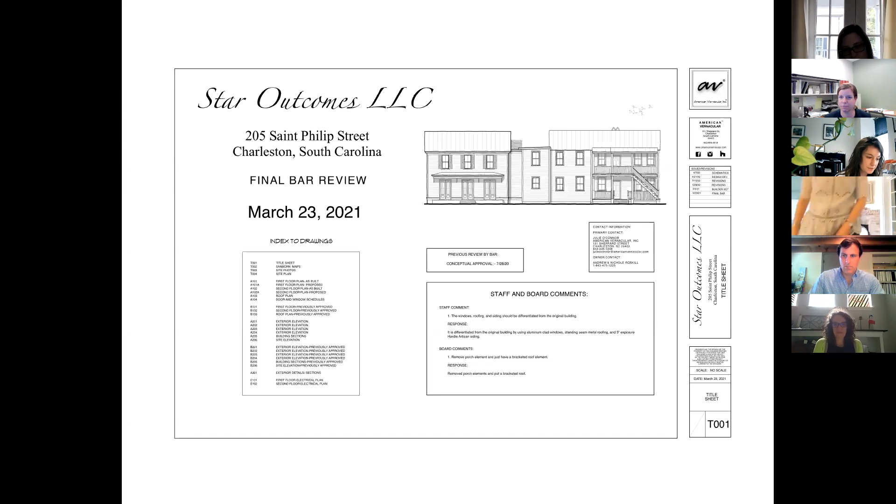Kim, could you go to the elevation page? Yeah, right there, thanks. Actually, Kim, could you go to B203? There it is, okay. So this is a depiction of what we had submitted last time versus this time.

Essentially we took the board's comments about the porch and did a bracketed roof over maybe a little raised patio element versus a proper porch on the side, to reduce the volume and visibility from the street. That's probably the only part of this building that will be visible, because it's so far back on the property.

Additionally, we did end up needing a two-story connector piece, but we don't believe it will be visible at all, because it's tucked in fully behind the volume of the second house. It's also not as wide, so it tucks in pretty nicely.

But essentially, we kept the design the way it was. We appreciated that you recognized we kept the ceiling heights low, and there wasn't a lot we could do about the building's height. But it is, in my opinion, as secondary as we can make it, particularly when you look at it with the main front house.

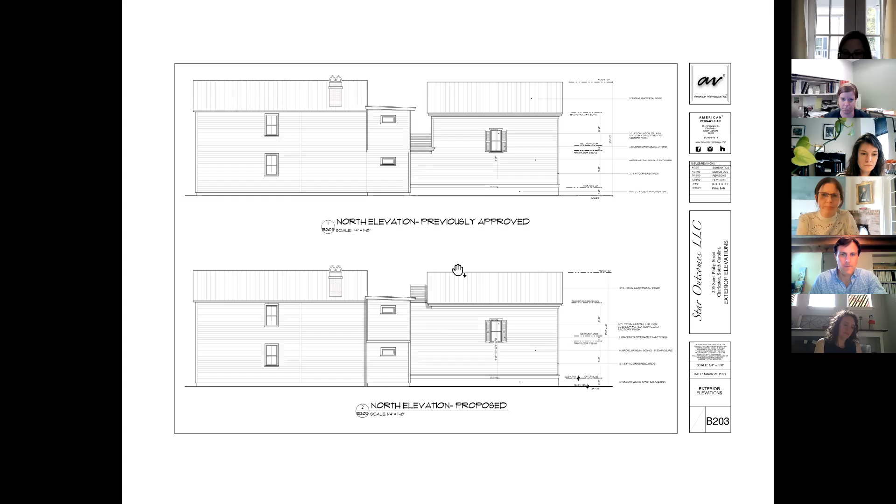What's the material proposed for the porch floor and the stair tread? I couldn't tell from your section. Yeah, so that'll be masonry — a stucco rise and then a bluestone top. My clients are also preparing a new landscape plan from Cindy Klein that will include some beautiful materials and hardscaping. Thank you.

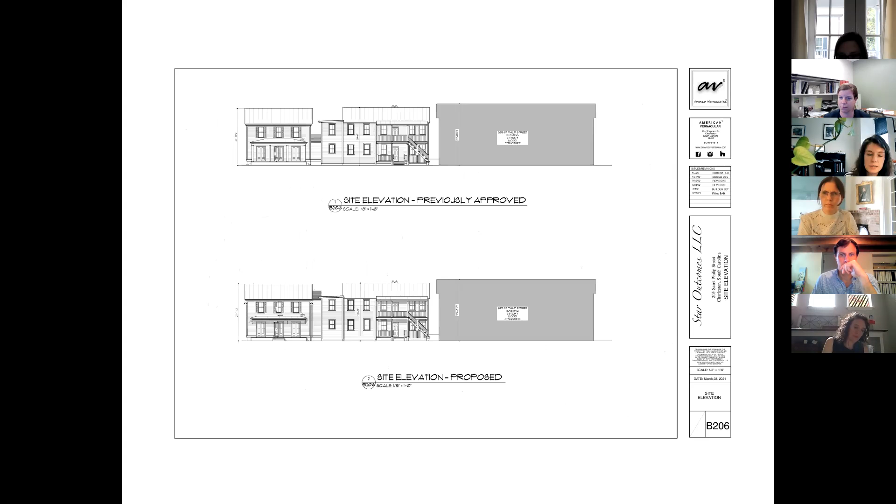Any other board questions? All right, we'll move on to public comment. We don't have any public comment.

On to city staff recommendations, Kim, thank you. We just have a couple comments. The rear addition may be further differentiated by using a 6/6 window instead of a 2/2, but all other materials and finishes clearly delineate separate construction campaigns, so this element is appropriate as proposed. The hyphen has been extended to include a second story since conceptual approval was granted. Volumetrically on paper, the previous version was more appropriate and respectful of the addition, but it will be too far away to perceive from St. Philip Street and blocked by a gable roof on Spring Street. So staff is recommending final approval with staff comments.

I'll start. I was not here for the original application, but it does appear that the applicant has answered the board's calls for a few tweaks. And I'm pretty sure that this new volume is going to be the most logical and orderly volume on this site. So I feel good about it.

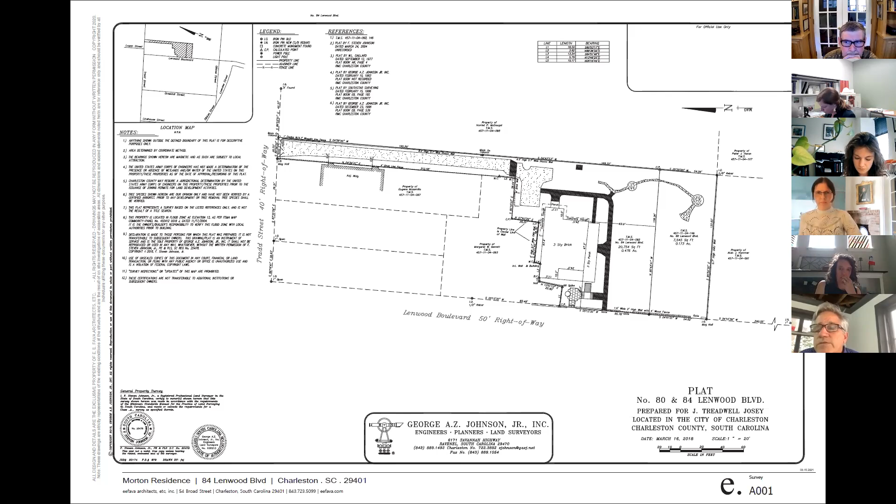Next page, please. So again, just a more detailed site plan of the existing conditions, and we have vetted this with the zoning department, Lee and Penny. No issues there. Next, please.

As Kim had highlighted, the area where we are putting the proposed garage, where a kind of screen porch structure had stood previously, the location of the stair, and immediately to the right of the garage location on the site plan where the proposed pool will be is where one stood previously, and is being put back into place with a much more handsome design. Next.

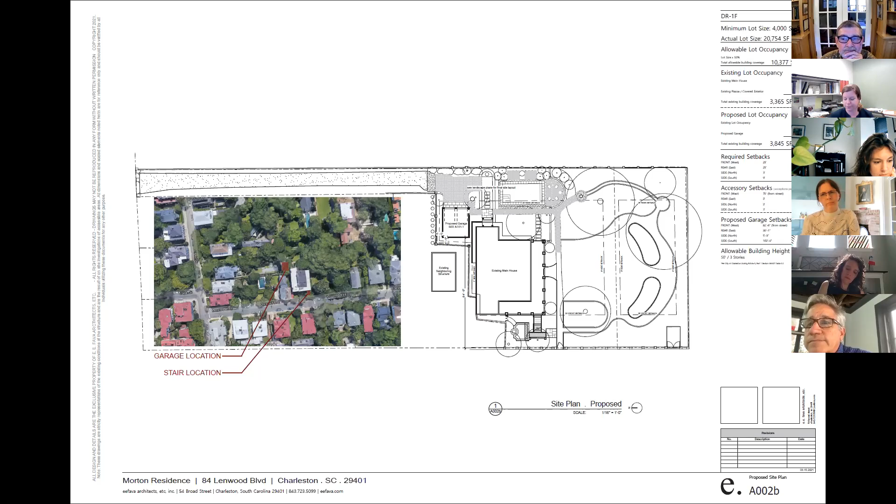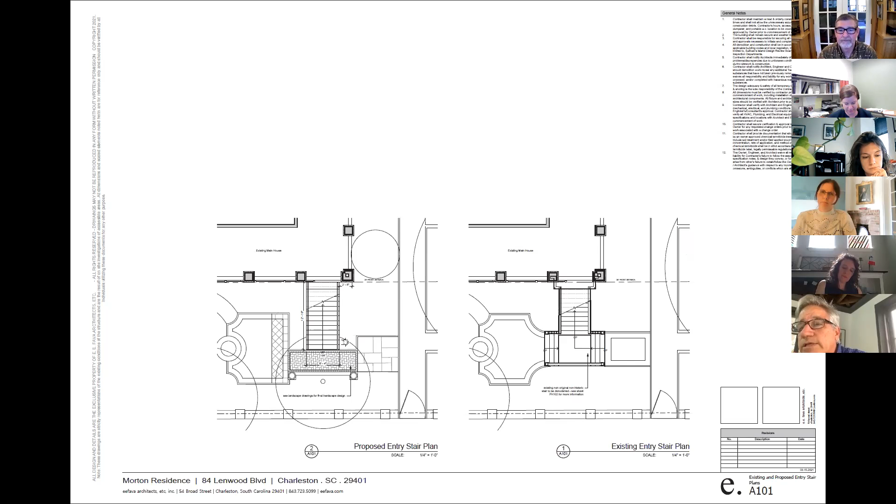So as far as the plan goes, the one to the left is the proposed entry stair, which becomes more of just a straight run, a masonry stair, something that's much more appropriate to the caliber of this structure. The idea is, again, it's a masonry with an iron rail and covered with probably fig ivy or something like that. The current stair is a wood stair, again, post 2004, that's demonstrated on the right-hand plan, which has an awkward transition between the two spaces. Next.

The garage structure is again very modest, a one-level structure with a shed roof, so as not to be obtrusive in any way, shape, or form to the neighbors. It is completely behind and out of view from anything publicly. The left area shows where it would sit in its proposed design, and the existing shows the open area.

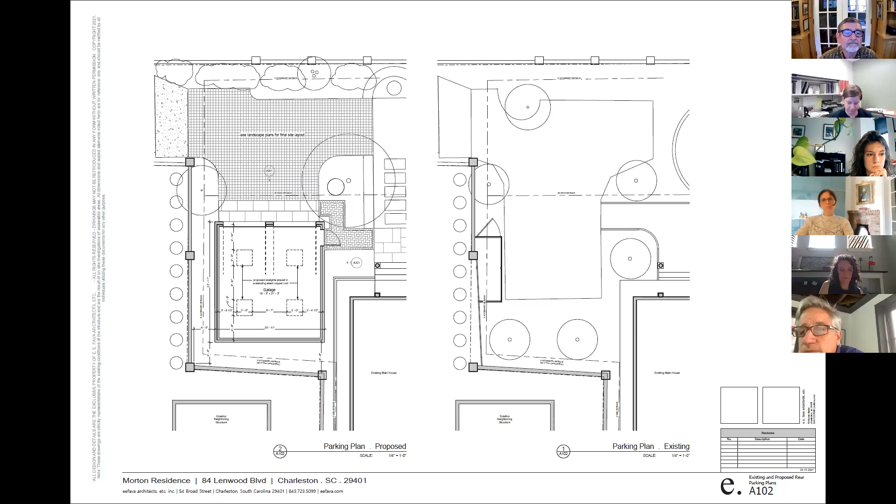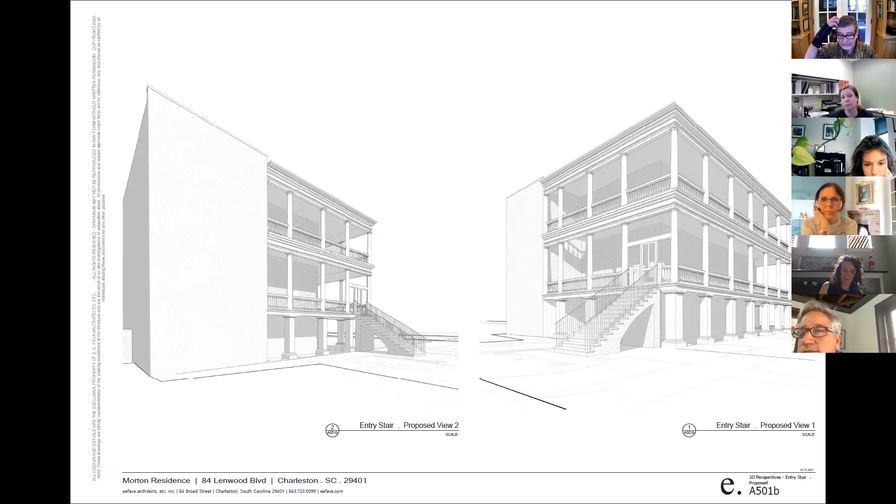What would be proposed out of all masonry, as we said, and detached from the existing house. The area for the current garage, where the garage would sit, and as proposed.

We've got some reference photos, and as Kim indicated, it's a little difficult to see, but top left is as you approach the house, which would be on the right from Lenwood. The next one is looking head on to it. The one over is the gateway to it, and once inside the property, that's what you see, where the entry stair would be to the right under the canopy of the tree.

The far right photo at the top is the view of the gate to the Tradd Street area. The next photo down in row 2, far left, is the length of the driveway. If I'm standing with Tradd Street at my back, you get the length, and can see the perspective of where it goes up, and it terminates at the next photo where the proposed new garage would sit.

The next photo is looking back towards the house where the garage would be adjacent where the former structure was. The next several photos are really just trying to give you an idea of the staircase that's there presently, kind of oddly put together with some maybe less than typical balusters and rails. It's been there a little while and maybe not out of the best material and starting to show some signs of rot, but more than anything, it just seems a little odd for the home, and something a little less obtrusive and more substantial material-wise would be more appropriate.

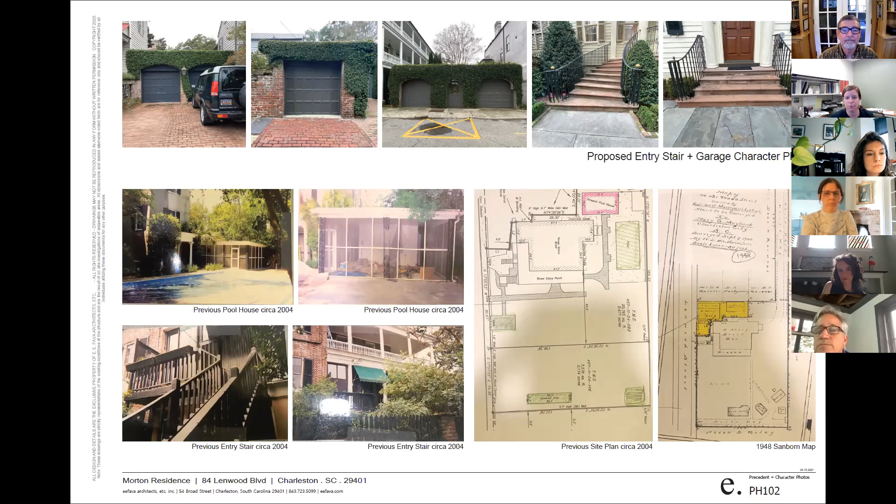The bottom right 4 photos are all in reference to the structure in the pool that had been there prior, and plans addressing that as well. These are Glenn's plans where all of the associated landscaping details and the layout for the pool were put together.

I think again, as you can see, it's been well specified with the materials and where the pool would sit. All of it is not visible, and I think here, because it's a category 2, but a significant improvement, it's extremely respectful of what the house is doing. The pool's 14 by 20 in a current, or what was a former location, with the stone band around it. There's a low masonry wall at the right where you see the seating area. It's perforated brick. Again, not visible, but a wonderful addition to the property, defining and securing the pool area.

I can probably go through these rather quickly, but addressing the staircase, that's what we had discussed before. That's the existing area, and Glenn has been kind enough to weigh in on how that area would be re-landscaped.

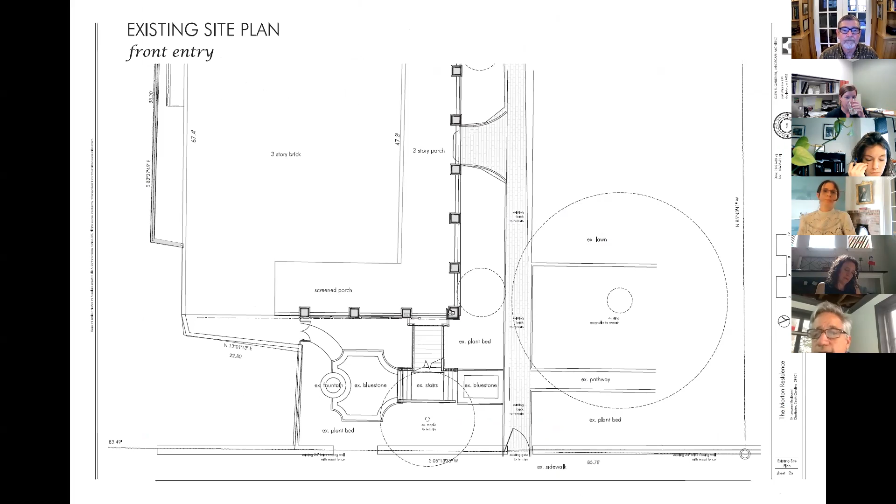This is the existing area of the rear that you had seen when we were putting the garage and the pool, where presently it's just a drive and a lawn. The area of the demolition.

The simple solution to the new stair, which opens up the space and respects the tree that had been planted there prior. Next, please.

The pool design and how it will connect with paving and the materials specified accordingly for the garage section. Again, it's remote and will not have any visual impact with neighbors. Next, please.

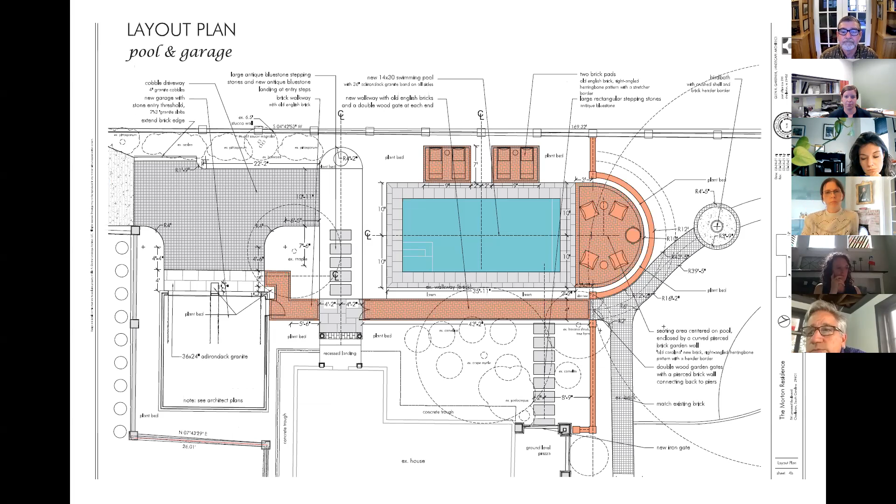These are Glenn's details associated with all of the materials. We did speak with Historic Charleston and the Preservation Society, and there were objections from neither. The Mortons spoke with their neighbors, at least 86 and 129 Tradd, which are adjacent and probably most impacted, and there were no objections voiced by them either. Happy to answer any questions. Thank you.

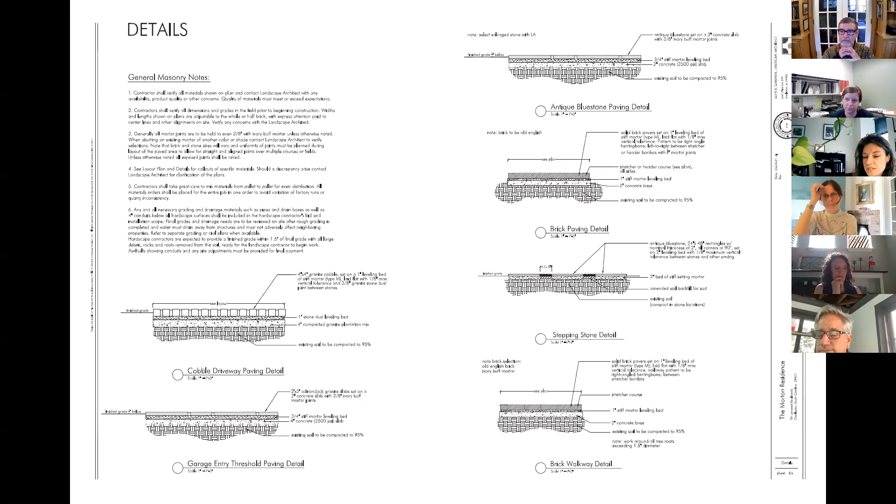Thank you, Mr. Fava. Are there any board questions at this time? All right, we'll move on to public comment. There are no public comments.

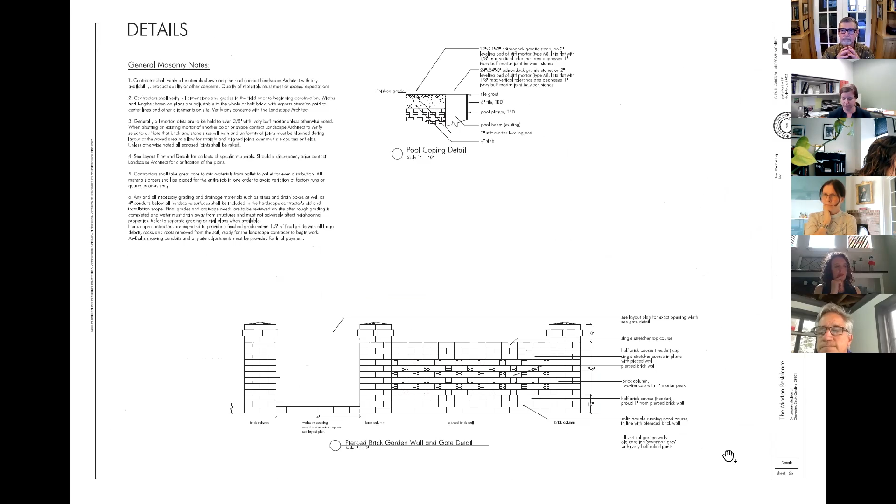Kim, I'll turn it over to you for city staff comments and recommendations. We just have a couple. Although it's very handsome, unfortunately the garage is not visible from the street. The much improved stair is visible, but again, an improvement on what's there and relates to the building more appropriately for the historic house. The hardscaping is minimally visible, if at all, but it appears to completely be appropriate and lovely. So we are recommending final approval.

Thank you, Kim. Mr. Fava, did you have any response to the staff comments? No, we appreciate it. The Mortons and myself and Glenn both, thank you. All right.

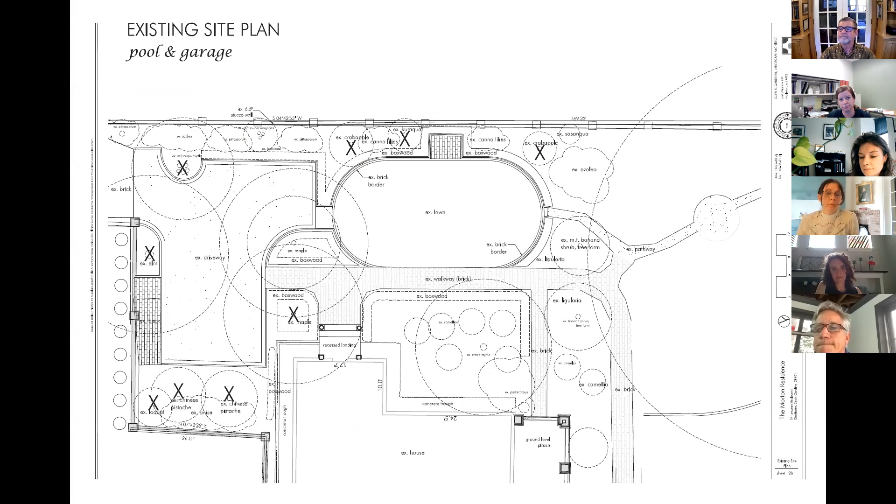Now we'll open it up for board discussion and a vote. This is Julia, I think it all looks great. I wish that stair could magically float without the wall support back at the porch, but it's totally fine. I think this is lovely, and I agree with staff.

Fillmore Wilson here. I think it would be difficult to find something to object to in this. It's a really nice plan, and I particularly appreciate the materials in the garage. So I agree with staff. This is Lindsay, I agree with staff's comments that it is unfortunate the garage is not more visible. It'd be really nice, so I agree with staff.

All right, I'll make a motion for final approval. Bill, did you have? Oh, I was just going to say I did log in late, I apologize. I don't know if I'm eligible to vote on this, but I did review the drawings ahead of time, and I do agree with staff's comments and recommendation. Yeah, so you can vote.

Julia, did you want to make a motion? Sure, just for final approval. All right, we have a motion on the floor from Julia for final approval. Do we have a second? Fillmore Wilson, I'll second. Thank you. Put it to a vote. Bill, yay in favor. Julia, yay in favor. Fillmore, yay in favor. Chair votes the majority and the motion passes unanimously.

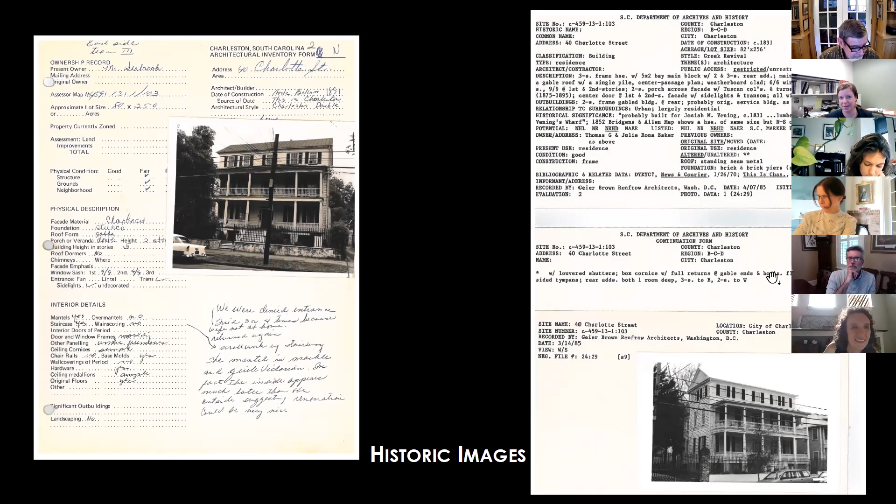The next one on the right is from 1985. And these are the Sanborn maps, 1888, 1902, and 1944.

Mr. Huguley, if you're here, you can have the floor whenever you are ready. Thank you, Kim, can you hear me? Sure can. Hi, I'm John Paul Huguley, I'm the founder of the American College of the Building Arts, and this is a new project for us. 42, as Kim mentioned, it's behind 40 Charlotte, an 1831 Category 2 building. The front house has a lot of historic ties to the building arts, which is important to us.

The people that have owned the house from the very beginning—even the lot before—were a carpenter, and the person that built it was a lumber merchant. The second family, the Walker family, had the property for some 70 years. They were stone importers and introduced a lot of the stone elements to the property, the beautiful steps and marble mantles.

Lot study is the most important part to understand about this lot. Like the last project, it's very deep—shown in green at the top, the lot is 255 feet. As Charlotte Street diverges from Chapel Street, these lots get extremely deep through there. Looking down Charlotte Street, a typical lot would be 112 feet, a whole block is 224, so a whole block could fit in our lot and still leave about 30 feet.

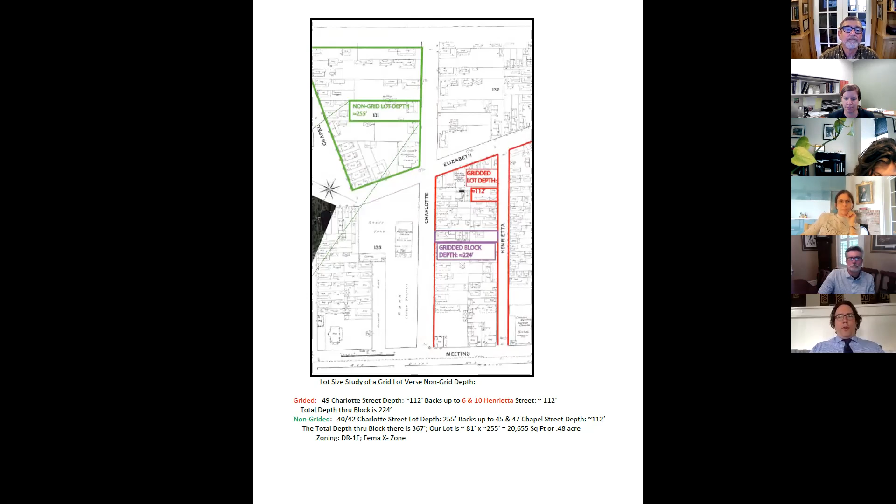That weighed into the idea of what we wanted to do with this, looking at the back buildings and meeting the neighbors to try to understand what could be built back here.

This section was most helpful—you can see the historic house on the right at the top, and from the front line back to our proposed building in the back it's almost 200 feet to the front wall, but 200-something to the middle of the building. You can see the building on the bottom left and the footprint, but pay attention, there's a large oak tree on the east side that we were paying respect to.

Over the last 2 years of owning this property, I started looking at the light on the property, the architectural history of the neighborhood, which I didn't know a lot about even though I've lived here a while, and the present-day neighbor concerns.

What was most interesting to me, presenting to the BAR staff this last year and to our neighbors, was that the number one issue has been how you'd develop any property with this much land in the back. I committed early on that I wasn't looking to be a developer and put 7 more lots back there as zoned, but to build something for myself—in this case a duplex—so I can help fund some projects for graduates of the college and the students. That's really important to me.

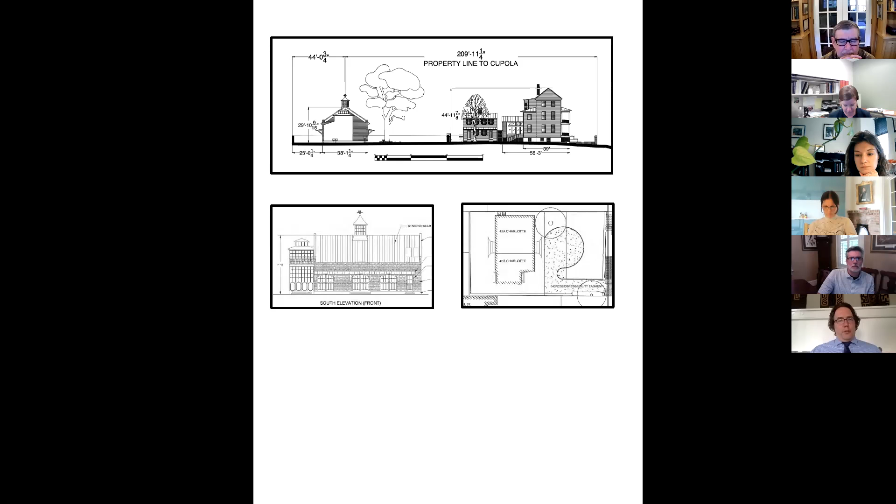Go to the next slide, flip through these next few slowly. These are things you've seen before—this is the straw bale wall you approved, with the traditional lime and brick cap, which we did as a workshop with the students to define it.

Stay on that shot—it gives a great look. Looking north, you see the huge oak tree on the right. Our building will be set back behind this garden wall, in what's called 42; this picture is taken from 40. If you look all the way back, you can see the White House with the blue shutters, which sits on Chapel Street.

What we learned through that workshop and getting to know neighbors was that there had been a battle before on our street, Charlotte Street at 21, where they developed the back of a property and added 4 more units. That lot is smaller than ours—only 0.38 of an acre, versus our 0.48—but they brought in smaller units, kind of what's popular today, maybe a micro home or something small.

I committed from day one that although I wanted a place to live, work, and entertain with the building arts to showcase, I wouldn't necessarily want to go that direction. Overwhelmingly, in the letters of support, the neighbors are adamant about please don't chop it up. Through our studies with the students and the work we've done, we've shown the outbuildings that are here.

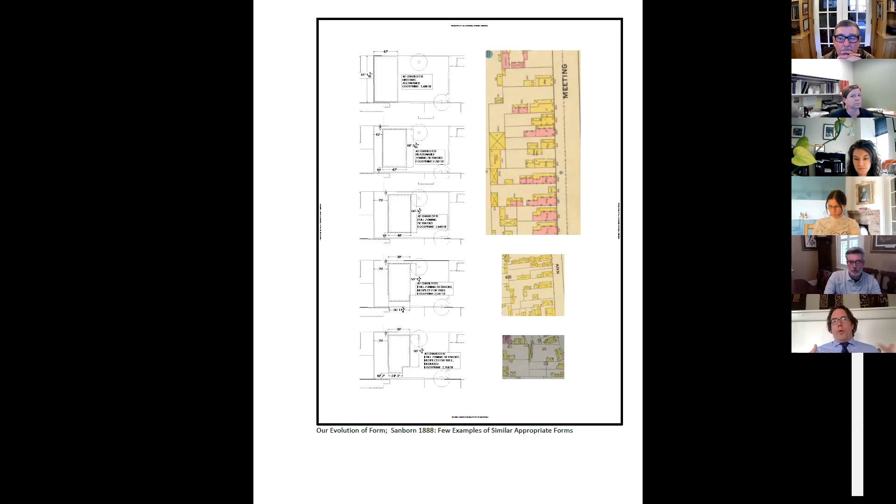It usually is set on the line of the property, with no fence. In this case, working with zoning and some of the challenges previous neighbors had, we pulled it back and kept shrinking our building, but we were tight between the tree and our setbacks. We have a neighbor in the back who worked with us from day one, saying she didn't want anything built here, but if she did, the more setback, the more we could work together, which I'm hoping we tried hard to accomplish.

Can we go back to that photograph? The one on the right is really important. This shows we found plenty of examples of larger outbuildings, and we're aware of 543.06, and we want to make sure it is subordinate. So we brought all of our heights and footprints, but what we wanted to show was which model did we want to pick, using our timber framers and picking something that is authentic.

If you look at that photograph of the Sanborn maps, in the middle, this is a great photograph of Meeting Street right up close to us. Go back one - yeah, upper right. Zoom in, back, right, stay on there - right on that shot up in the middle, you'll see four different residential outbuildings. This is just the easiest one because it's clear.

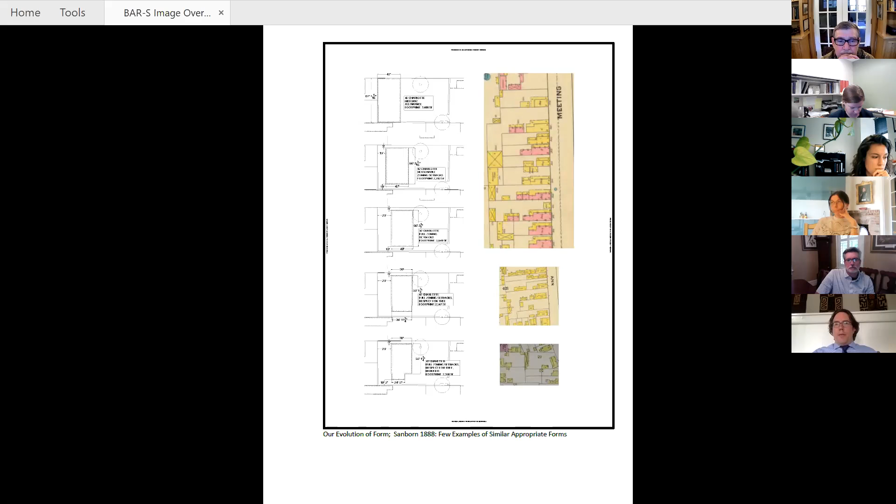304.5 Meeting Street is approximately 50 by 58, so it's a large structure in the back. It's not a look that we wanted from a timber framing perspective. The second one down, which is labeled - if you could zoom in, I don't know how close y'all can see, I cannot, it's very small - but it says wagon shed. It's pretty cool. It's kind of the one we went after.

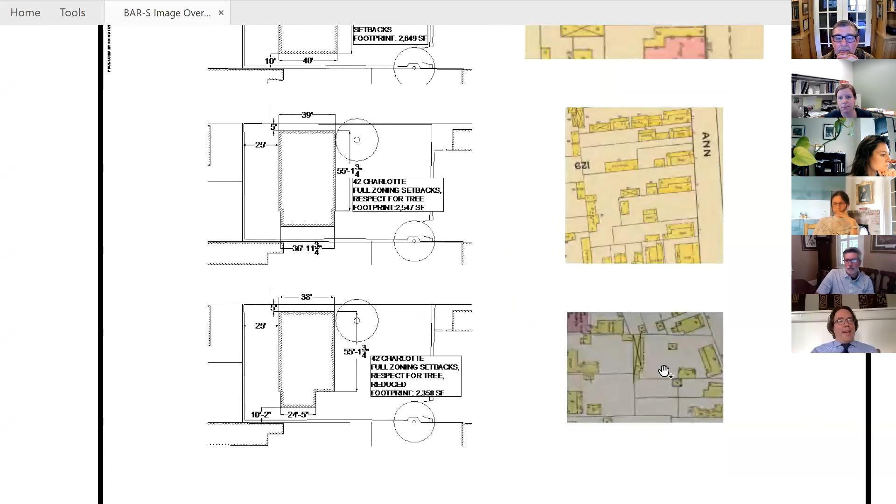You're on it, stay on that shot - yeah, there you go. It's the second one down in the middle. Slide down a little bit, keep sliding down. So this form is the best form that we've had, which is the wagon shed, which is more like a 36 by 55.

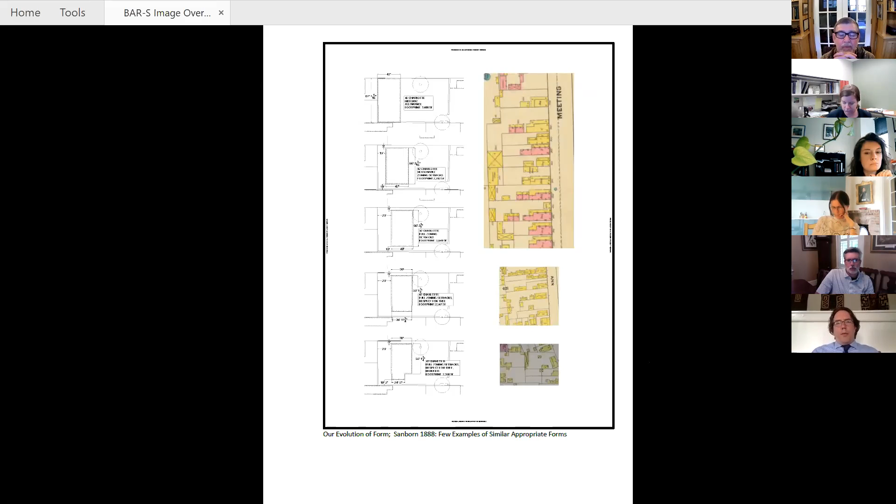So the studies that we've done are attached at the bottom. We put them in there for y'all's reference, with the drawings as well. Kim, can you just jump down to the actual couple more shots? Right there, they're the height studies. There's a good one - back up one.

Go forward one. Okay, so there's the height study of our barn-like structure on the left with its glass conservatory, compared to the heights of Chapel Street. And we know we're shorter than the front house, which is at 45 feet. We're at 30 feet. We just place these against that.

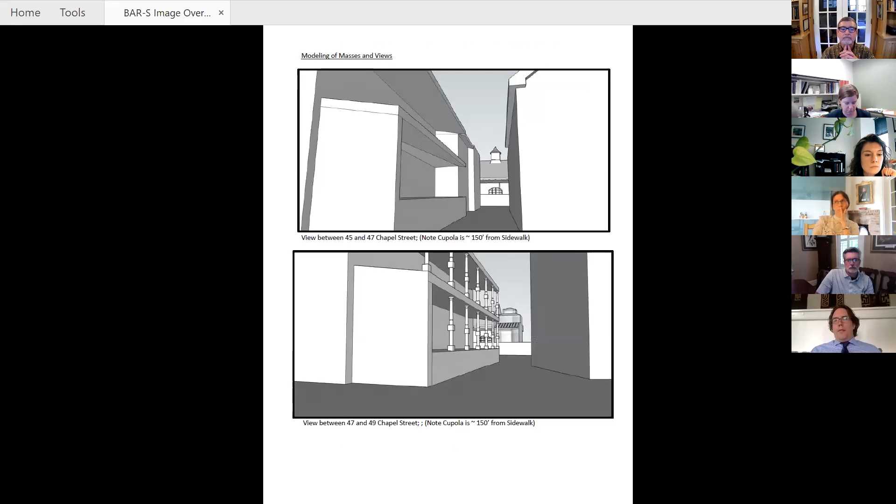And then will you go forward, Kim, one more please? These were studies that Kim asked us to do, looking down from the front and looking back, to get a sense of how far back this structure sits. It's right at 150 feet back. Go one more, Kim - and it shows you from Chapel Street, looking through two of the houses, kind of the view you would get.

I didn't mention the glass little conservatory. It was on the property. There was a glass structure, and we want to introduce that. Go one more, Kim, and I'll wrap up for you. Oh, go back one, sorry.

So these are the looks through to the property. The main points here are that we have a charrette coming up with the students to start doing design of windows and doors, but we wanted to get a general direction and conceptual direction that this form, this one structure, a duplex in the back of the property, is the direction we want to go, rather than trying to break it up into smaller units.

And we feel that way. And more importantly, we feel like we met the test of 54306. And finally, creating kind of a living laboratory where we can showcase the authenticity of timber framing, masonry and plaster. We don't have that here in Charleston. We don't have one place to go to see that. If you have any questions, I'll stand by.

Thank you, Mr. Hughley. Do we have any board questions at this time?

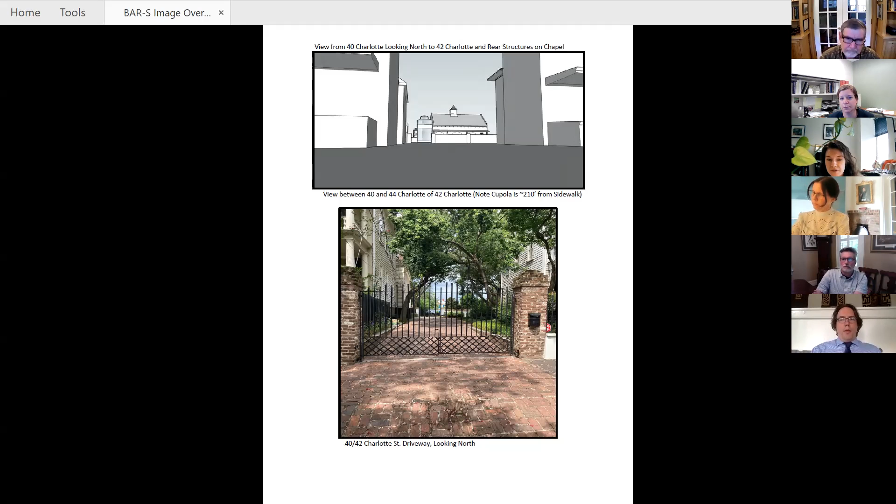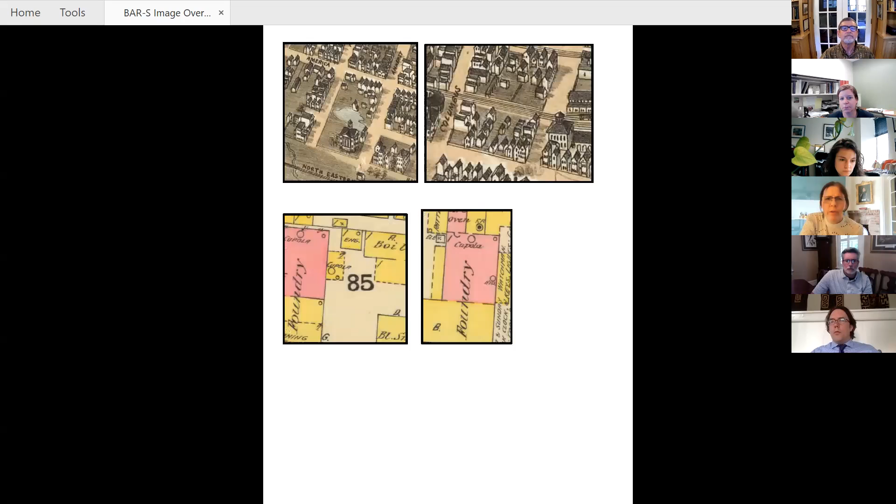I have a quick one. Since it seems like height is kind of sensitive, I'm curious why you are raising the first floor, because doesn't it sort of render those carriage doors unusable? Yeah, great question. Can you hear me? Yes. Okay, I wasn't sure if I was on.

We're going to do a raised basement like the front house has. So we do have to work on that transition. The staff has already given me a couple of ideas of what to do, but we're going to work in the charrette coming up about how it can still, we're calling it a coach house right now, keep its architectural direction as a coach house, but still also have a little raise.

And you want to do that in timber framing. I know, Julia, we don't want that splash line off there, even though we have the brick there. We would love to have some kind of raised 18 inch base if we can. Did that answer your question? Sure, thank you.

I just have one question. It appears to be 30 feet plus the parapet. Plus, what is the height of the cupola? What's the overall height of the building? I think, Glenn, it's 37 or 38. I should know that, but I don't know.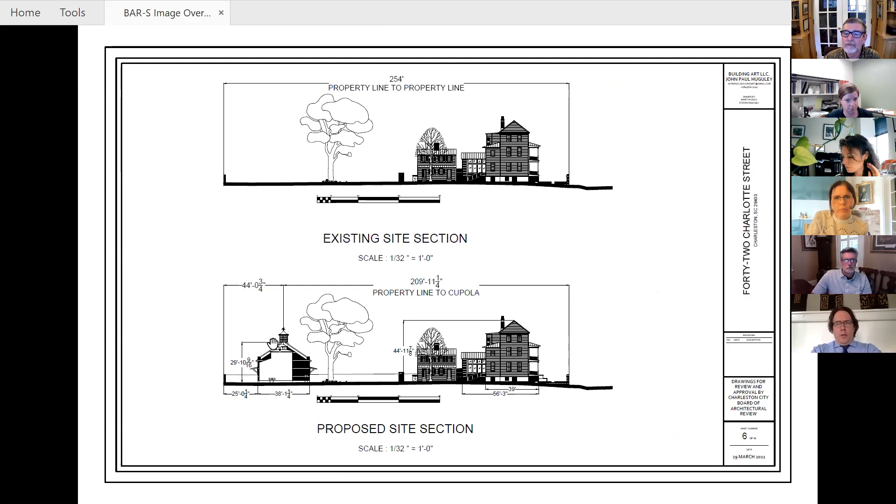It's on there, but the ridge is where we measured it from. Yeah, go down, zoom into that. Does that go to the cupola or just the height? Just the ridge. And that's what we went off of, just because of sections 354, 308. I think it's 7 feet if I'm remembering correctly.

Did you hear me okay? I can hear you. Okay. Any other board questions at this time?

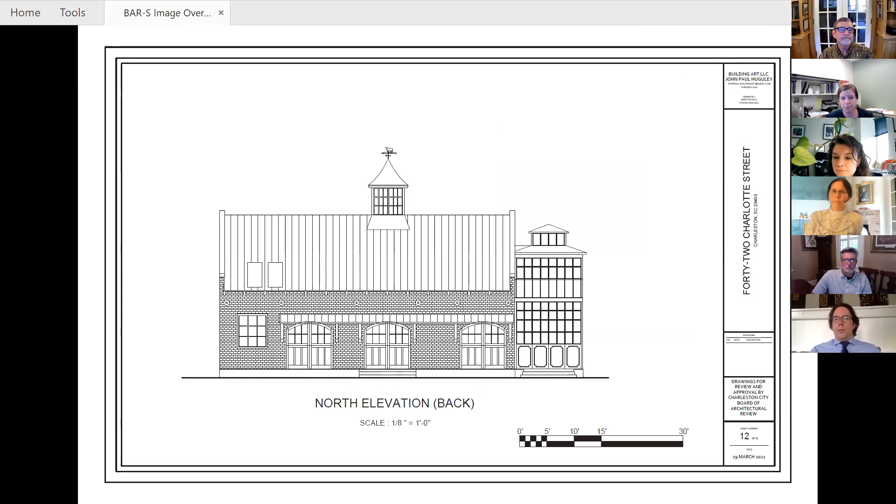All right, we'll move on to public comment, and we have several that I'll read out. All right.

To Charleston's Board of Architectural Review from Vicki and Pete Neighbor, the owners of 40 Charlotte Street. We're the new owners of 40 Charlotte Street and purchased this property with knowledge and design interest of what is being proposed to you on February 5th, 2021. The new structure known as 42 Charlotte Street sits within a horizontal property regime that we share with the applicant, John Paul Huguley. We have studied other options with more structures and smaller footprints, broken up massing and scale.

And prefer one brick structure with a relief system program, hence the added glass conservatory. We think that was a great compromise for us in the design process, with a nod to history for the glass structure that was once here.

We realize our front structure is tall, almost 45 feet, and working with Mr. Huguley on the duplex, he was able to make the structure a story and a half on this first submission by slightly adding to the footprint to restrict the height, i.e. 2 full stories or more.

Given that this structure sits almost an entire typical block back from Charlotte Street, we believe the depth of the structure and width are less important than height or breaking these into multiples. It was a design challenge that we feel is a win-win for us and neighbors, making it look like one structure.

We know he has continued to contact the neighbors to engage them in this journey, as we respect that immensely. The structure is oriented like our home and pays respect to a grand oak tree that we desperately would love him to keep. The orientation speaks not only to our home with its close attention to the location of the cupola and garage doors.

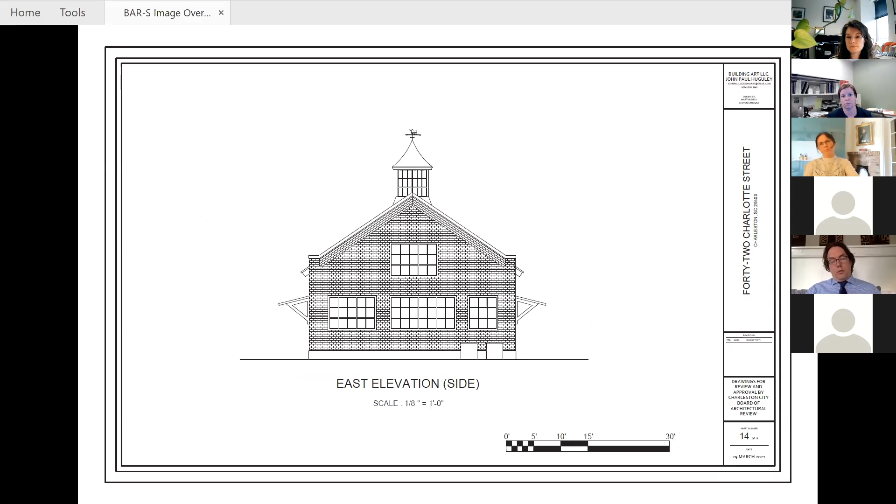We have several comments. The most visible element of the proposal will be the roof, the westerly door, and the conservatory. Staff feel that the roof is overly broad and is highlighted by the unusual depth for a rear building. Appropriate dormers might mitigate the most prominent and most visible feature of the project. The building is not subordinate in mass and seems akin to a warehouse, which is concerning, and narrowing the depth might help the massing be more traditional for a secondary structure in the neighborhood, and again, help the roof massing. Restudy and balance the fenestration.

The windows should be vertical in proportion rather than horizontal, and directed toward a residential scale rather than industrial. The westernmost door floats above the ground plane with no access and should become windows if there's no intention for access. The cupola is out of scale and should be restudied.

The concept of a conservatory is interesting, especially considering something of the sort was once on the property. Restudy and narrow the connection to the element from the masonry building. The delicate detailing here will be more successful. Some whimsical or folly-like details could be added, but it should remain fairly simple and relatable to the utilitarian masonry building. Eliminate the brick entirely on the western end of the conservatory. So the staff's recommending deferral for massing and general architectural direction. Thank you.

Thank you, Kim. Mr. Huguley, did you have any response to the public comments or staff comments, or want to clarify anything? Yeah, let me clarify a few things.

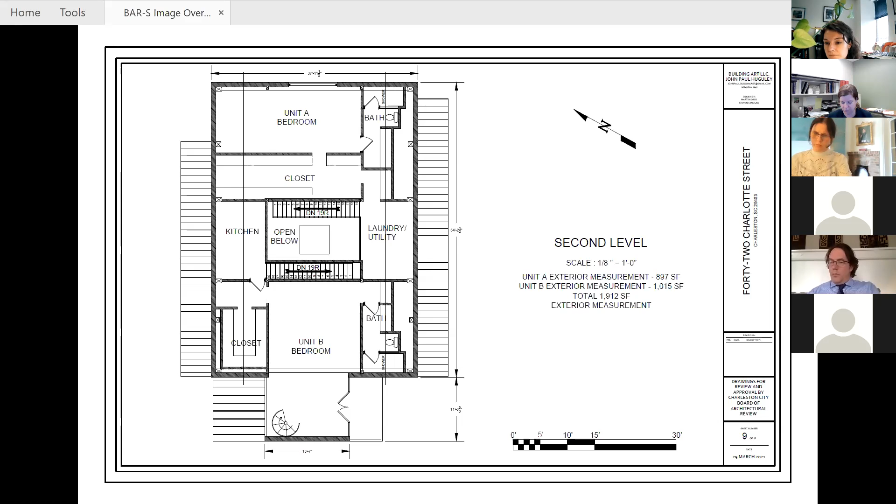This is Bill. I'll go ahead and start. I would say, and I appreciate that last comment from Mr. Huguley, I do agree with the comments of staff. I do think that they're all definitely valid and worthy of that restudy process. I guess one other point.

Seeing elements on this elevation right here, for example, it appears those are earthquake bolts or some replication of earthquake bolts. I'm starting to get a little concerned about differentiating this building historically, because I know the talent of the people that are going to be building this, and it inevitably could give a sense of false history to some point. I want to make sure that, and potentially in looking at the detailing, that there's at least obvious indicators that it's, you know, built of this time, just to conform with our Secretary of Interior standards, guideline.

All in all, as far as the single unit versus multiple units, I agree that is a better approach. So I would just say that I agree with staff's comments and recommendation, and then just that other side comment from me about making sure that it speaks of its time and doesn't go too far to replicating something, because I think with the potential talent involved in this, it could easily read as something from another time.

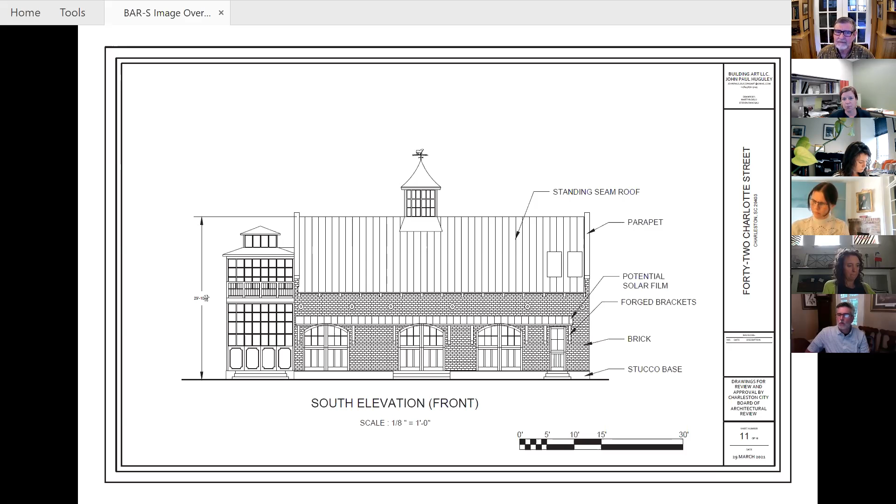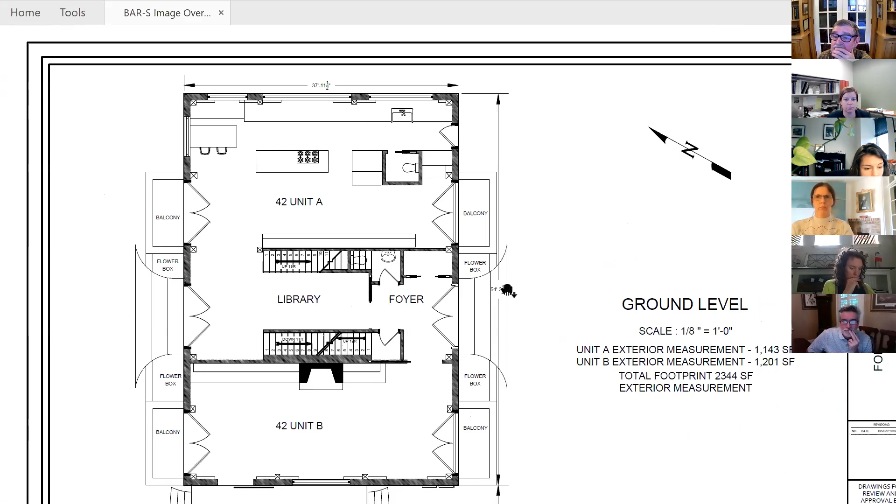Just to add, going back to the difference between a denial and a deferral - I'm actually not seeing that a denial from this particular board places any sort of time limitation on when an application can be refiled. So perhaps you're right, Glenn, about that difficulty between the difference of a denial and a deferral. I would say staff's comments are well worded and I believe do encompass what would have been my concern, so I'm more inclined to support the recommendation as well. I believe the comments we've all made have been taken into account.

So it's okay, I guess I'll go ahead and float a motion if you guys are ready. I'll make a motion for deferral of the application with staff's comments noted, and a board comment to assure that future proposals indicate a building detailed to its proper period. All right, we have a motion on the floor for a deferral of the application with staff comments noted and a board comment that any future proposal indicates the building to its proper period.

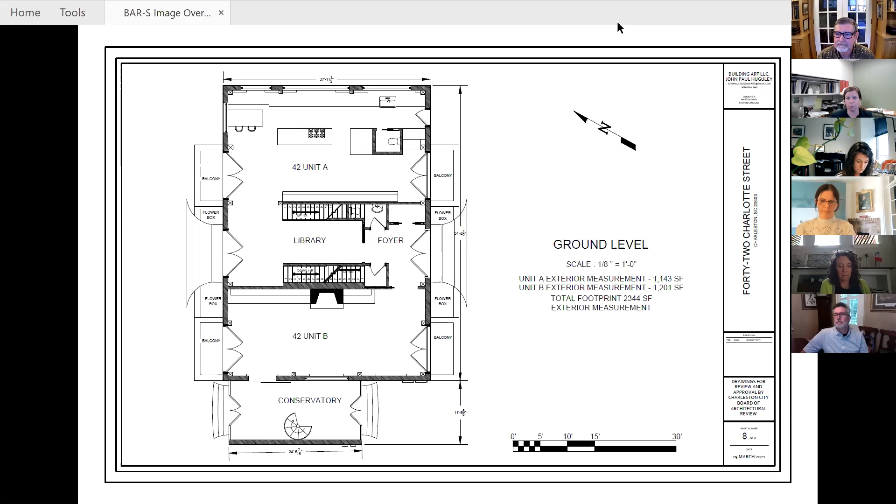Agenda item number 6, 17.5 Hanover Street. It's requesting conceptual approval for modifications and renovations. The building is a category 4 in the East Side neighborhood. It was built in 1913 and it's in the Old City District.

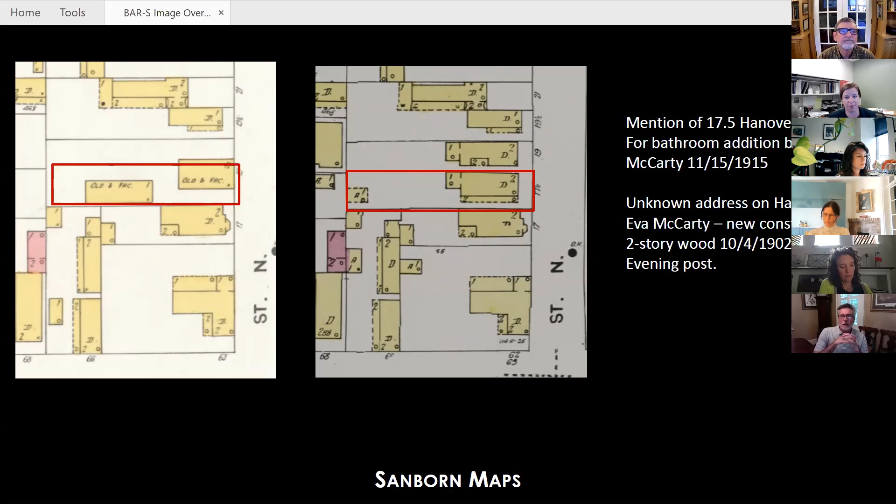These are the Sanborn maps from 1902 and 1944. You can see the house was built sometime during that period. There was a mention in the News and Courier in 1915 of a bathroom addition from the owner, Eva McCarty. The only other time Eva McCarty was mentioned was with an unspecified address on Hanover Street, for the construction of a new 2-story house in 1902. Trying to really zone in on the age, we could say it was from 1902, but we could find out more by looking at the city directories, but I digress.

Mr. Gettings, you have the floor whenever you're ready to speak. Yes, hello, good afternoon. I appreciate the board hearing our application. The drawings I submitted, I imagine you could start with C1.

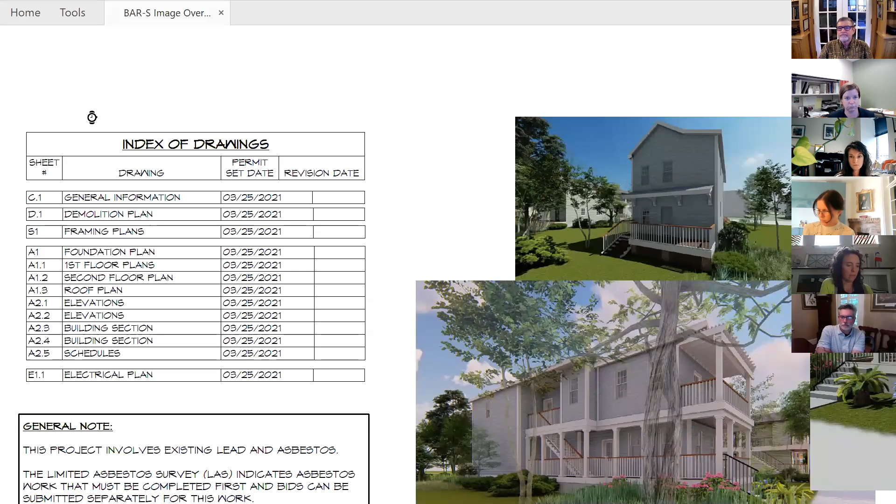The existing building was built in 1913 as a Charleston single house. That was interesting to learn about the 1915 bathroom addition, I didn't realize that, but I have some other additions I will talk about. The building was purchased by the owners, the Lowndes, and Miss Robin Lowndes is scheduled to speak also after I finish, if possible. In the 1950s they purchased the house, and it was a single family residence. It was in its original rectangular shape, as I thought at the time, but there may have been a bathroom added, as you stated, Kim.

The front porch and the house itself was used to raise a family from the 50s, and then in the mid 70s there was an addition to the house. Over the left veranda, a bathroom was added, and an extension was also added to widen the middle room in the house. The extension is structurally non-conforming today, with 4x4 columns extending down through the lower veranda into the foundation. Also at that time, the second floor front porch was enclosed to become a bedroom.

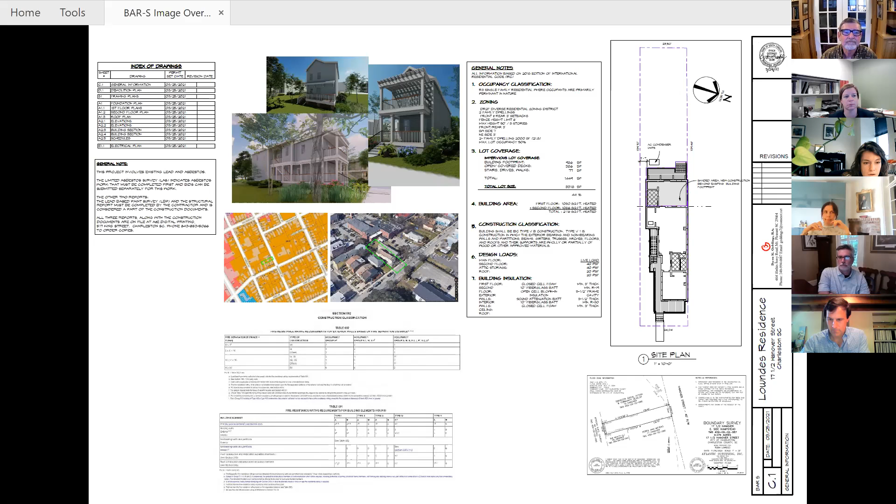So with that being our challenge, the project is part of the City of Charleston Community Development and Affordable Housing project. The goal, as I saw it as an architect, is to take what had become a jigsaw puzzle and make it whole again as a Charleston single house, appearing as a single house as much as possible. Several steps were taken to do that. We propose to restore the front elevation and second floor porch, respecting the characteristics of a typical Charleston single house.

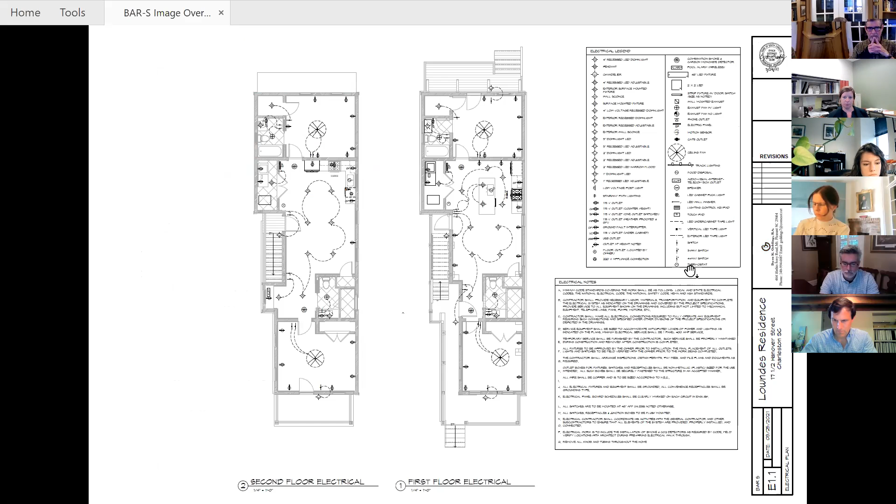Finally, the proposed materials should be revisited to be compatible with the historic construction of the house. PVC and other synthetic materials are not appropriate for use on the historic building. Again, we are very supportive of the project, and with further study of the points above, we look forward to seeing it progress positively through the design review process. Thank you.

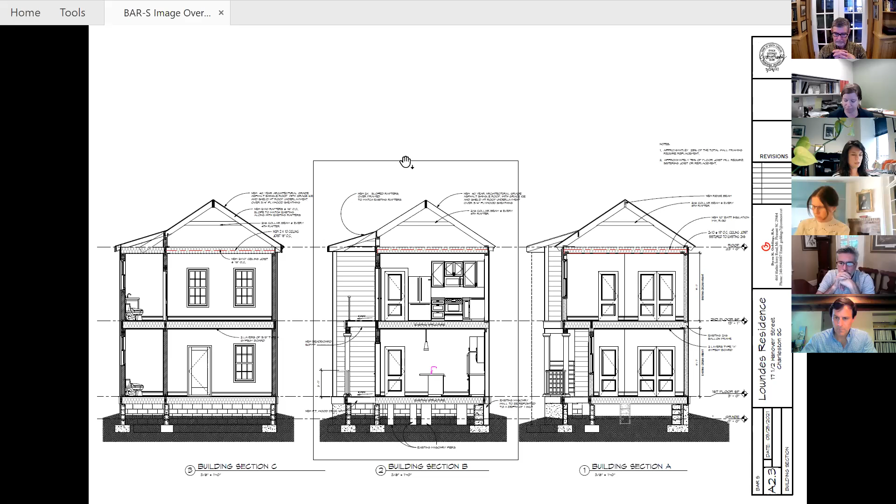Thank you. All right, then I'll turn it over to you for staff comments and recommendations. We just have a few comments.

The material palette should eliminate vinyl siding and PVC trim, which is not permitted in the old city district, and should be wood clapboard, which is more appropriate for the historic building.

The new addition should be differentiated with a hyphen or change in plane, which would delineate the historic portion from the new. The front porch should incorporate 2 additional columns on the second floor porch, on the front porch, and 1 more on the ground floor to further balance the porch and give it a more vertical proportion. And this relates to the rhythm of the bays on the piazza as well.

Reduce the scale of the columns and construct the entire balustrade in wood. Use a traditional hipped roof on the front porch instead of the trellis element, and retain as much of the historic rhythm of the openings along the piazza as possible. Staff recommends conceptual approval with staff comments noted.

Thank you, Kim. Mr. Gettings or Ms. Lowndes, did you want any clarification, or any response to the public comments that were made or the staff comments? This is Byron Gettings.

No real objection to the comments. Will they be provided to me in writing? I wasn't able to get all of that in that fire hose of comments. Is that something you could do? Sorry about that. We will be posting staff comments on the website, and I'll go ahead and send you the link as well, Mr. Gettings.

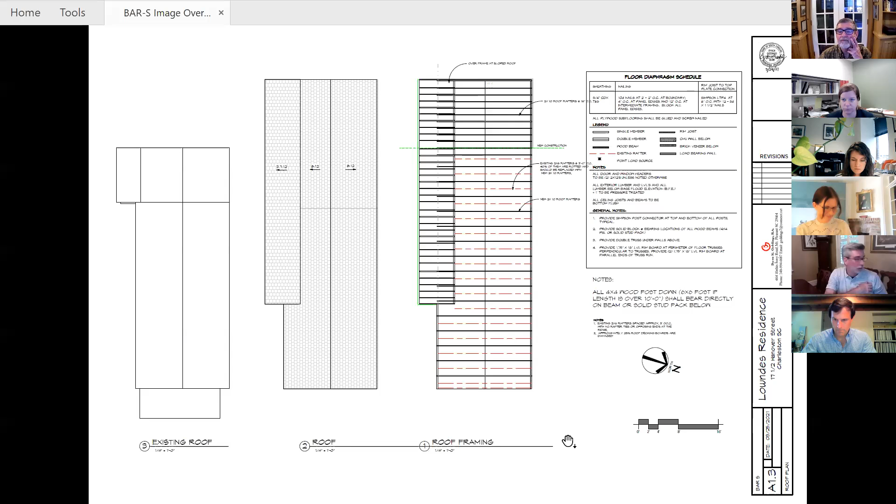Well, are you aware they're actually 4x4 columns that you're seeing coming down from the second floor that's interrupting that plane? Those are the columns that are in some of the photos. The south wall there on the building is a single plane. There is no offset in the wall plane on the existing—except, there you go. You can see now on the existing plan, it's a straight wall. And I tried to show those columns sitting to the left of your hand right there out on the porch.

So my question would be, are these openings historic? Yes, they're original. Yes, okay. My comment was just referring to the fact that we would prefer to see them retained in their location. Thank you.

It might help if you flip back to the staff comment page.

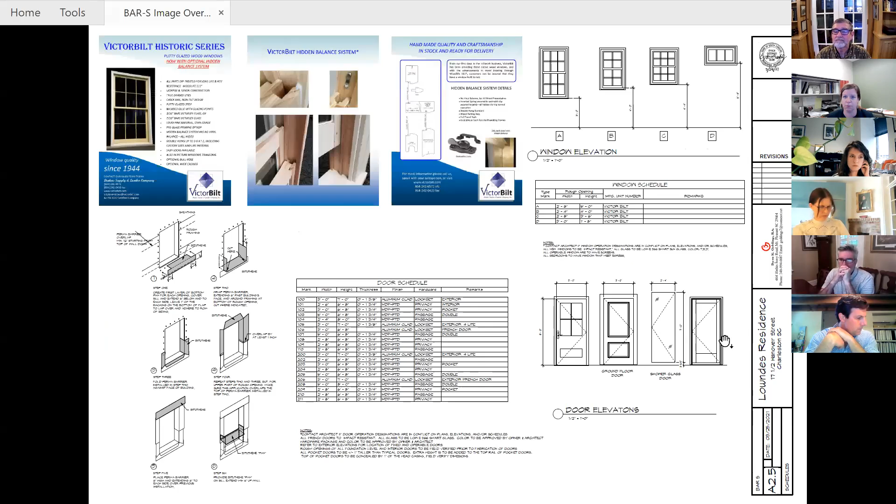Mr. Gettings, is that the only one you needed clarification on? Yes, that one was real important too, because it lends to the livability of the unit. The width of the living room and kitchen then gets seriously compromised. But I have to go with it though. Thank you, Mr. Gettings.

Let's open it up for board discussion and a vote. This is Julia. I'm just staring at that part of the plan, thinking about the comment he was asking about. It looks like that whole wall where those possibly original openings are has been shifted and would be removed in this plan. I mean, generally, I think staff has got it pretty thoroughly figured out. And of course I am supportive of affordable housing. I think having a roof over that upper porch will be a lot more compatible with the historic district. I guess I'm pretty ambivalent about the loss of that piece of wall

in the proposed living area on the first floor, but curious if anybody else feels strongly. Which piece of wall are you referring to, Julia? It's where Kim was saying she suspects those are historic openings, where she's highlighting right now. Yeah, that wall is actually removed in the proposed plan. It shifts to the left. Yeah, I see that, okay.

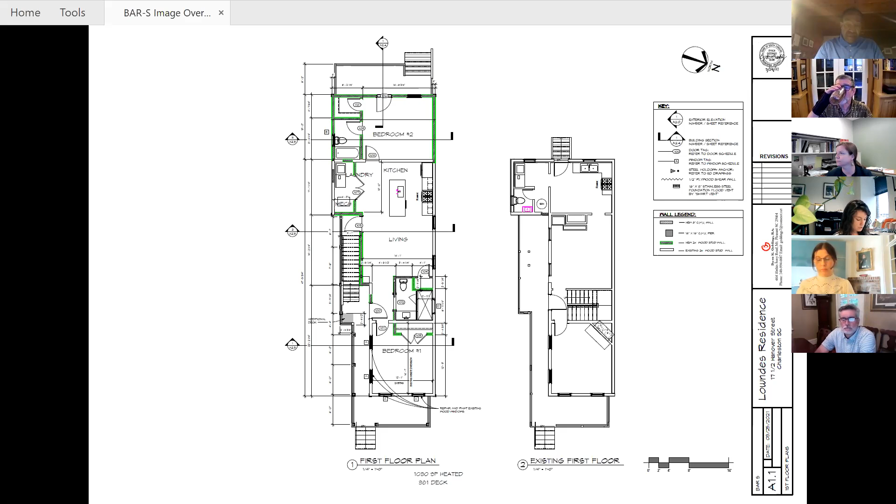Moving on to agenda item number 7, 1 Atlantic Street. Kim? You're on mute, Kim. Bear with me for just a moment.

Number 7 is 1 Atlantic Street, requesting replacement of a wooden gate at the driveway. The building is a category 2 in the Charlestown neighborhood, built in 1830 in the old and historic district. Just to orient you with the property, here it is near the corner of East Bay Street, with some existing site photos. Here's the gate in question, with the house on the right. This is looking west on Atlantic. And that's all you get.

So let's see who's here. We have Madden Jones. You have the floor whenever you're ready to speak. Mr. Jones, you're on mute. Miss Jones, excuse me, can you all hear me now? Sorry about that. No, that's okay. Hold on. Okay.

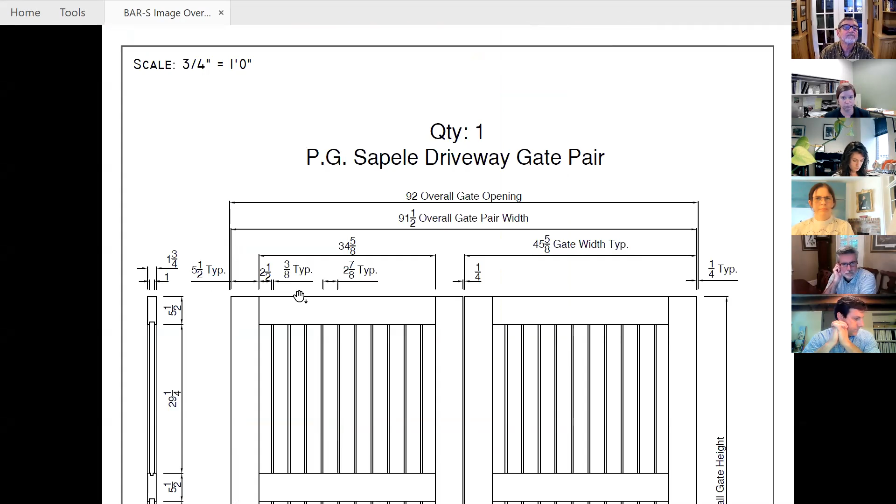The gate is currently in disrepair and we'd like to replace it, based off the designs at 26 Church Street, which is a category 3, with an easement that was included in our application. We will not be using these sloped wings, but just the thinner boards and with none of the diagonal bracing. The pedestrian gate at 7 Meeting, although not included in this application, is a category 1 and has a similar style with the V-groove boards and horizontal bracing. So that's our application.

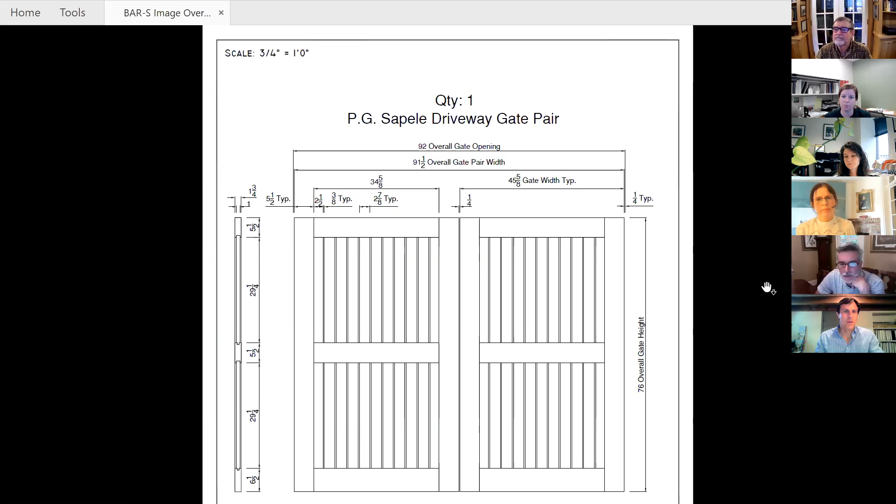Thank you, Ms. Jones. Do we have any board questions? Will that sort of beam above the doors remain, correct? Yes, correct. Have you identified the hardware for the gate? We have not. There is existing hardware that we plan on repairing or replacing in kind. Bruce Dingler is doing the craft on that.

Any other board questions? I don't really have a question, could I just ask - I'm only on one screen today, I'm sorry. Could we go back to the elevation of the proposed, the black and white? That's right, thank you. And we're happy to accept any sort of comments. We do not want the diagonal bracing, is our wish.

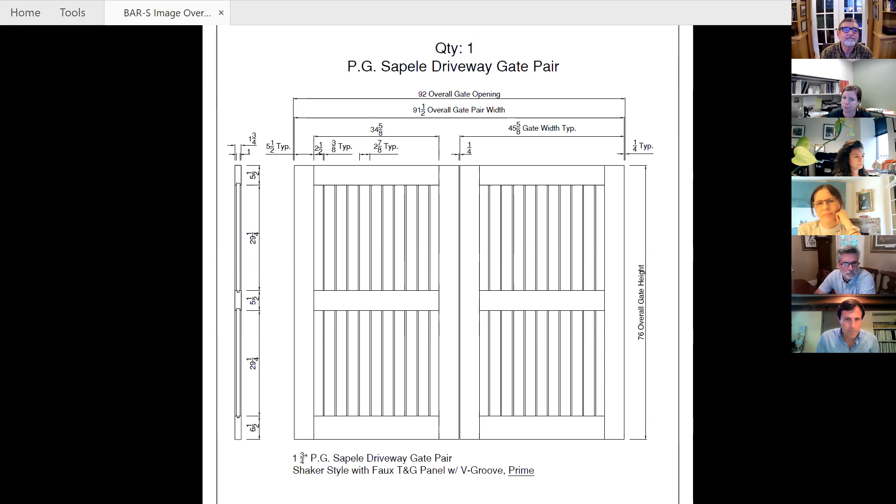Yeah, I guess my only question would be with regard to the depth or thickness of the gate. Is the vertical beaded board mortised into the frame? I'm trying to tell. Correct, mortised into the frame. I think if you scroll down one more, they do have a section of it.

There we go. Okay, thank you.

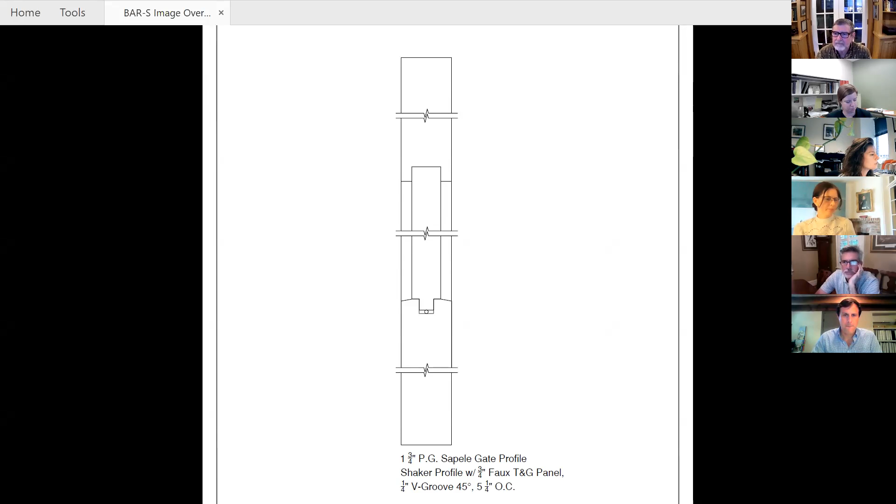All right, if there are no other board questions, we'll move on to public comment. We don't have any public comment for this one, Lindsay. All right, then on to you, Kim, for city staff comments and recommendations.

Originally, this came before staff for repair, which we were happy to do, but then they changed the design slightly. So it is required to come before you, but we still feel the design is appropriate as proposed. The construction of the door should be substantiated, however, as 1 3/4 inches seems flimsy and will be visible when it's open. So staff's recommending final approval with these staff comments noted. Thank you.

Thank you, Kim. Ms. Jones, did you want any clarification from staff? Nope, that seems reasonable.

All right, I'll open it up now for board discussion and a vote. Glenn Gardner, I agree with staff comments. I think the look of what's proposed is appropriate, and it just needs to be substantial enough. Even with Sapele, which should not warp, I think it needs to be made sure that it feels like an exterior door and not the thickness of an interior one.

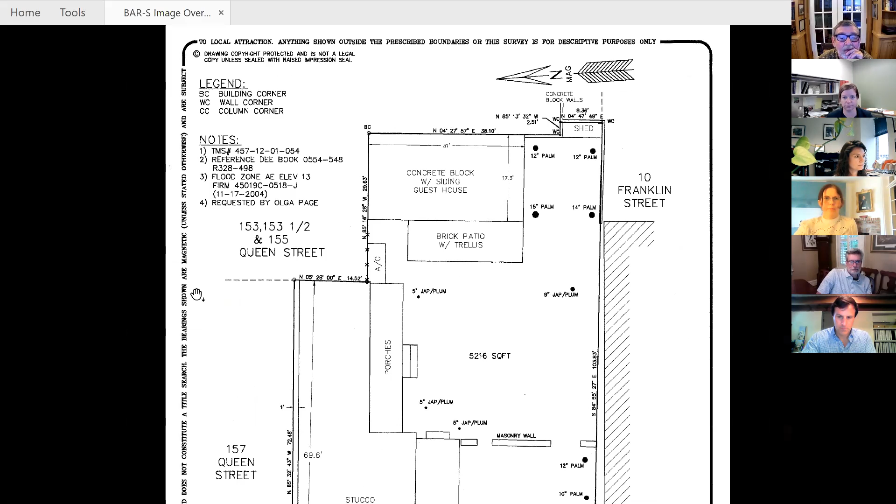Hello, and I appreciate everybody's efforts in considering this and working on this with us. My name is Rob Hannawalt. I'm representing Chris and Amy Searcy, the homeowners, and David Coxon, who's a really skilled architect. He's not able to be with us here. He lives and works in Washington, D.C., in Georgetown. So he did the drawings. I can't speak to them in first person, but as a builder and a craftsman, I think they're really well done. I leave the architectural comments and evaluation obviously to you.

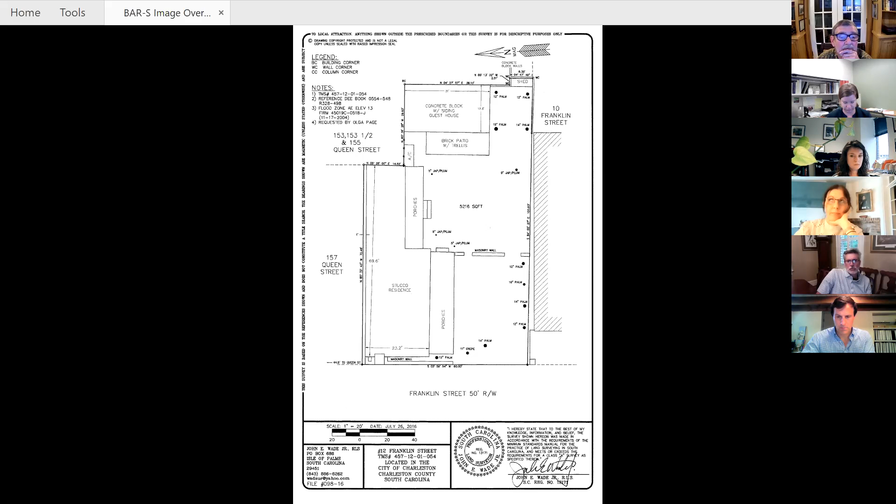We're really committed to doing a good job on this, using good materials, really low visibility from the street. We generally have the support of the neighbors, although we didn't do a letter writing campaign or anything like that. It's mostly about use for us. The homeowner works from home, and the primary residence doesn't have a good place for an office where he can do that privately. So we did a cabinets and finishes renovation inside the carriage house last year.

There was a bathroom that was pre-existing. It was in the center of the space, like a 5x8, and it sort of precluded the use of the rest of the carriage house as an open-spaced office. So that was removed with the hope and intention of doing this bathroom addition on the right side. He's in there working, but he has to take trips for the bathroom during his office day. So we're hoping to give him some relief from that.

It's not the original structure. We can tell from the age of materials that it's definitely been rebuilt a few times, or at least once. It's got modern plywood and block. The facade seems to be preserved from a little bit earlier, although we're not exactly sure how early, but I do think the architect, David, did a really nice job trying to follow the roof line and make sure we use that Dutch lap siding and picking up the octagon window. So that's really all I have. And thank you.

Thank you, Mr. Hannawalt. Do we have any questions from the board at this time?

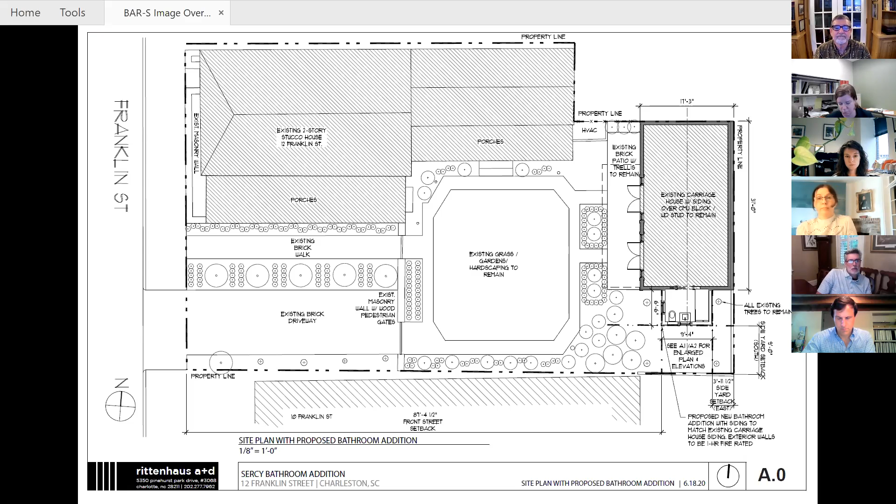This is April Wood from Historic Charleston Foundation. HCF has an exterior easement at 12 Franklin Street. The existing carriage house is not historic, and the proposed addition is small and minimally visible from the street. HCF has reviewed and approved the proposed alterations to its easement property, and we respectfully recommend approval of this application. Thank you.

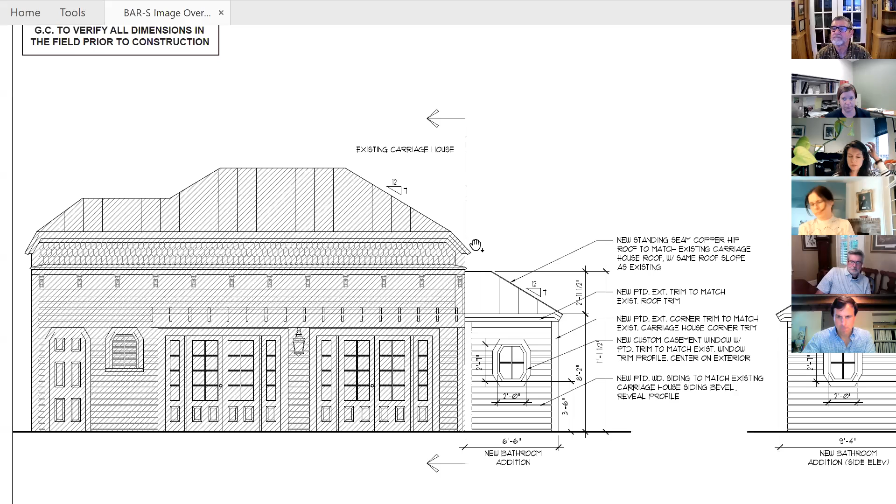I have a quick question for Kim. So remind me, the ordinance does not give staff the option to approve something like this, is that correct? Just because the house is Category 2? Right, only repairs without changes.

Okay, I have nothing to add. No problem with this. This is Lindsay, I too have... This is Bill, I'll make a motion for final approval. Second.

That was easy. So I've got a motion from Bill for final approval, a second by Julia, and I will put it to a vote. Fillmore? Yay in favor. Glenn? Yay in favor. Bill? Yay in favor. Julia? Yay in favor. Chair votes with the majority and the motion passes unanimously.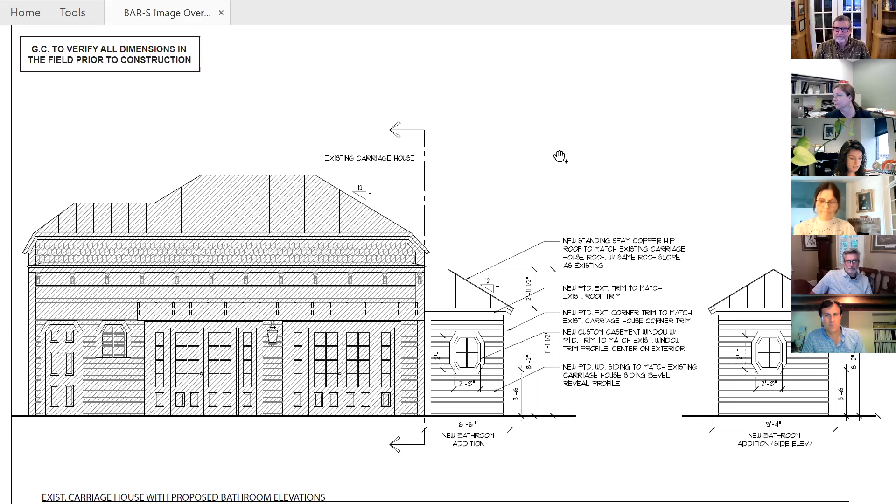Pretty sure that's the fastest you guys have ever approved anything.

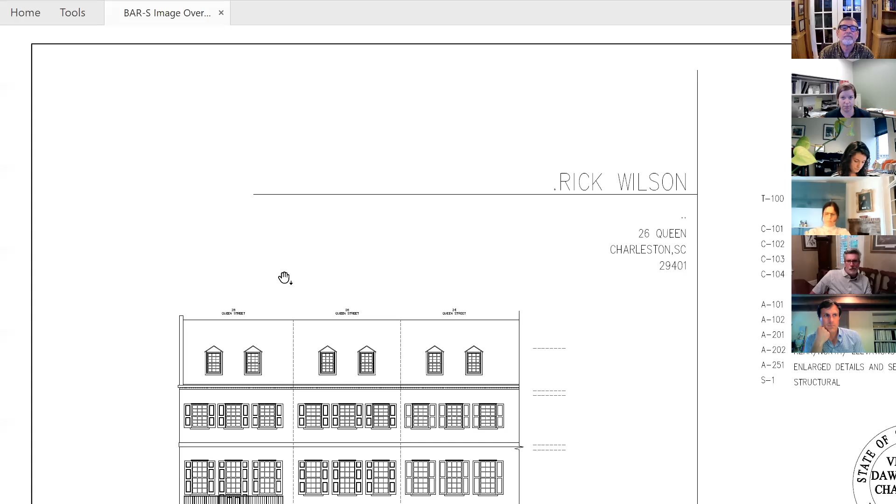Ms. Lane, you are on mute. Thank you for hearing this. We've found some evidence that there was a balcony here before, and I'd like to show you that. But I'll point out on this drawing—well, I can do it later.

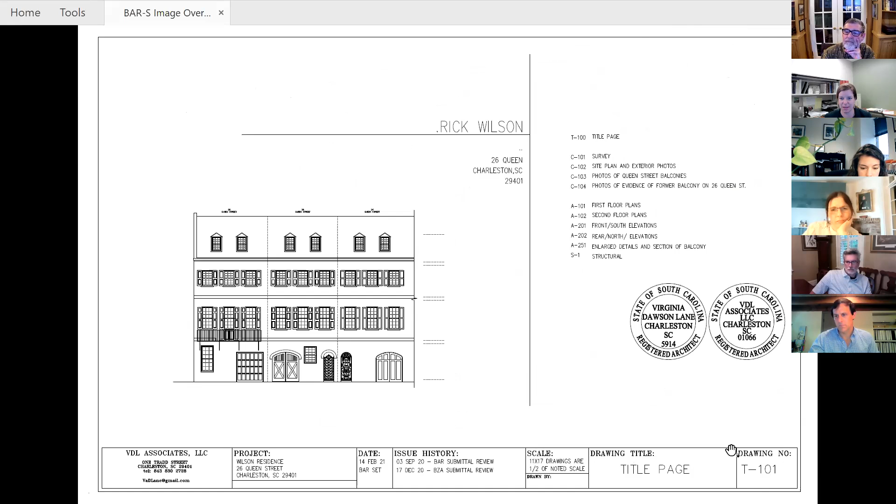Could we go to A101? Let's see, 1, 2, 3. The A's show the plans, there we go. Okay, so on the first floor, we have no changes on the outside.

So to A102, the second floor. There are 3 windows there, and the center window has a threshold on the inside, and we have found holes where there was a balcony on the outside.

We are choosing to add a jib door as opposed to a triple hung because the neighbor next to us has a jib door at 28 Queen, and then we do not have to replace the window. Okay, next would be 201.

Yes. So the existing is on the left and the proposed is on the right. You can see that our balcony is smaller than the neighbor's because we found the hole on the right-hand side and sized it to that.

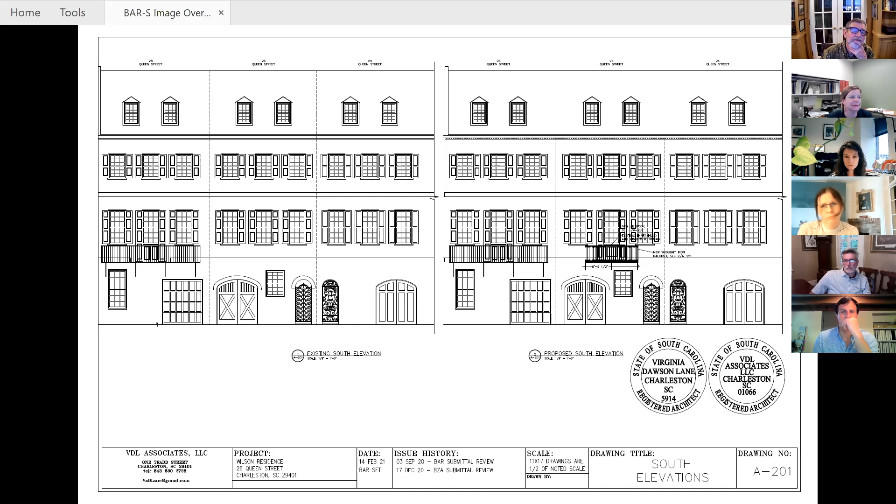202, please. This is the rear elevation. We added a balcony there and that got staff approval earlier, but it was just part of the package.

251, please. This is a blown up scale of the proposal for the Queen Street jib door and existing window and small balcony.

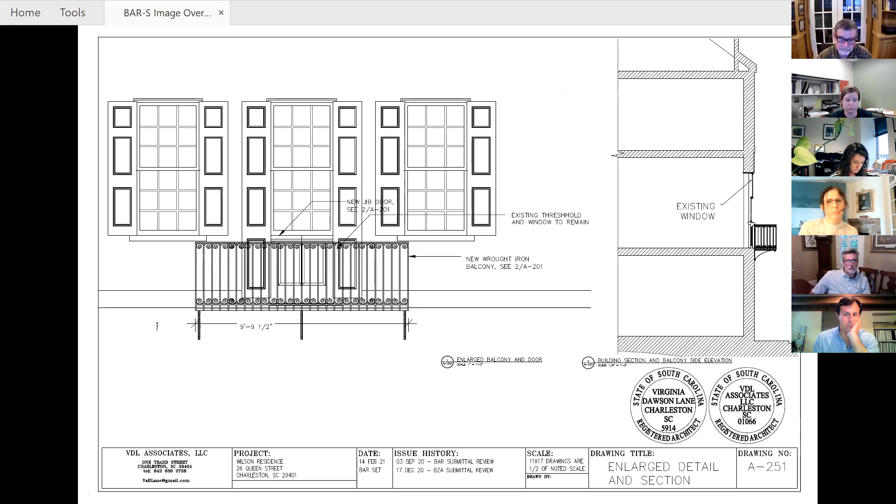C101, please. That's yes, it's the other way. Yeah. Kim, thank you—I was going to apologize for these all being sideways. You got them all straight. I thought you were deferring. I was told they were sideways. They aren't at all, so thank you very much.

This just shows that the balcony is on the property line on Queen Street. It's right at the bottom of the site plan. C102.

This shows the zoning requirements and they're all non-conforming, but we've gotten approval for that.

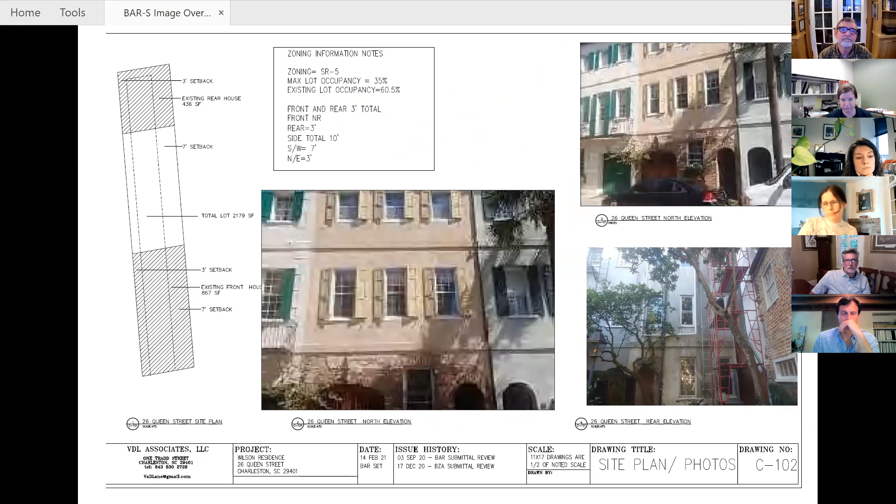Right, these are balconies on Queen Street, with a close-up of the one next door.

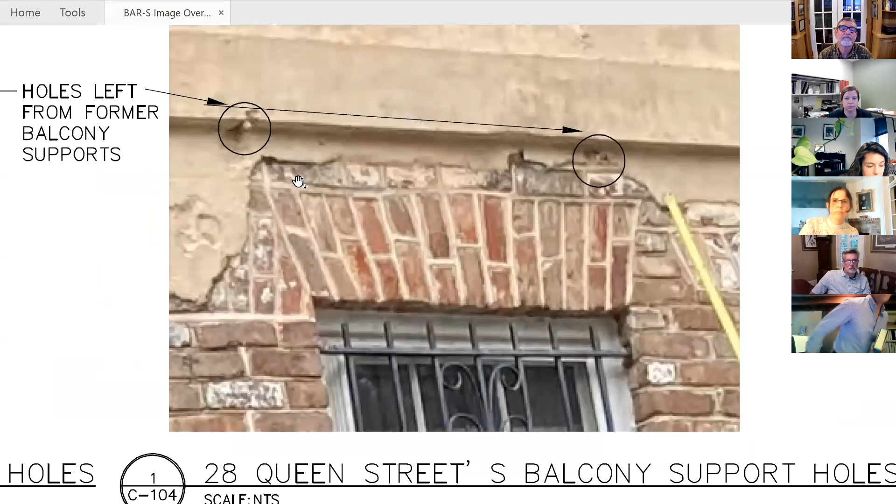We couldn't find the left-hand hole, but it's been newly stuccoed over there. The other evidence, on the third picture from the left, is the threshold under the center window. The other windows do not have that threshold, which implies there was a door there.

The other evidence, if we back out a little bit, is the trim on the center window—they tried to match the other windows, but it is not accurate. It's clearly not the same. And that's what the jumble of other photos are.

The others are structural, done by Mike Hance, just to make sure it doesn't fall down. I appreciate your thoughts.

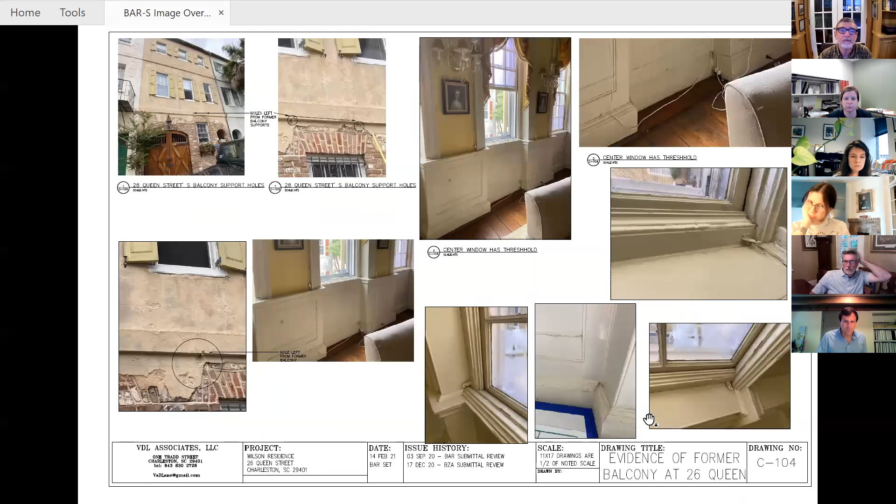This is Julia, and I think I know the answer, but did you find any photographic evidence of the balcony, or do you have ideas about how old the current conditions are?

I've hired Sarah Fick to look into this with Preservation Consulting, and she could not find any photos for us, partly because of COVID. I couldn't find any either in my library, but the physical evidence is what we have. We also talked with Historic Charleston and the Preservation Society, and they are in support of this.

Mr. Wilson, just out of curiosity, have you chosen who's making the balcony? Jimmy Tupper is the contractor. I'm not sure who's actually fabricating it—I haven't asked. I've worked with several good fabricators, but I'm not sure what he's doing.

I have two questions. Virginia, on the rear balcony, was there evidence there of a balcony, or was that just added? That was just added and is not visible from the street.

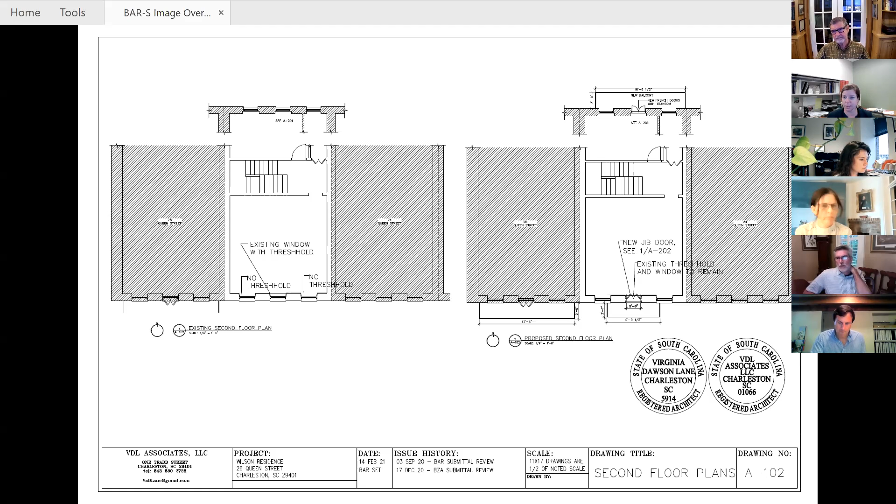We thought this proposal is very sensitively proposed and within historic context and is appropriate for approval. They've included all the details for final approval, so we're recommending final. Thank you, Kim.

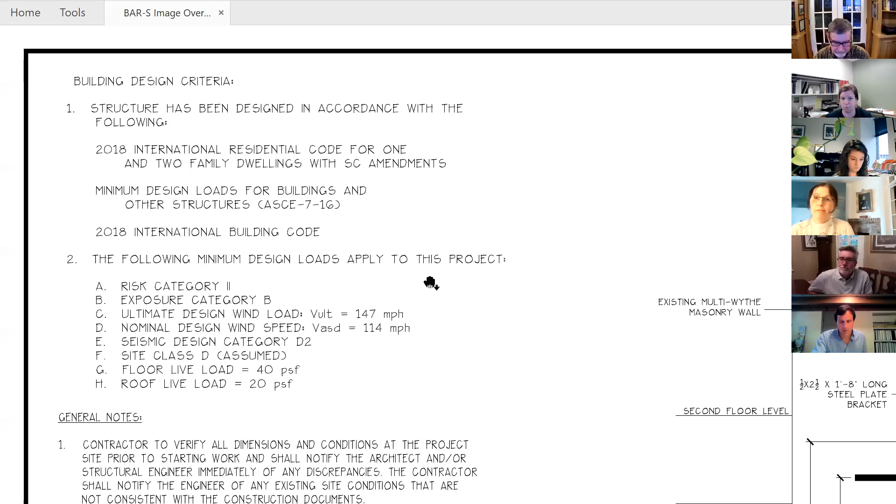Glenn Gardner: my comment would be based on evidence that there had been a door there. My understanding has always been that the balcony to the west was added much later, and that's why that building has a balcony and the others don't. If there is evidence that there was a jib door or a triple hung window there, I would certainly be supportive of recreating a balcony there.

But personally, this is a category 2 house—I don't think you can cut a hole in the front without evidence that there was one previously there. So I would ask for a site visit to determine that.

Fillmore Wilson: Glenn stated almost exactly what I was going to state. I think there is some evidence with the threshold that there might have been a balcony here, but beyond that it is speculative. I'm with Glenn—a site visit to try to understand the conditions more appropriately would be in order.

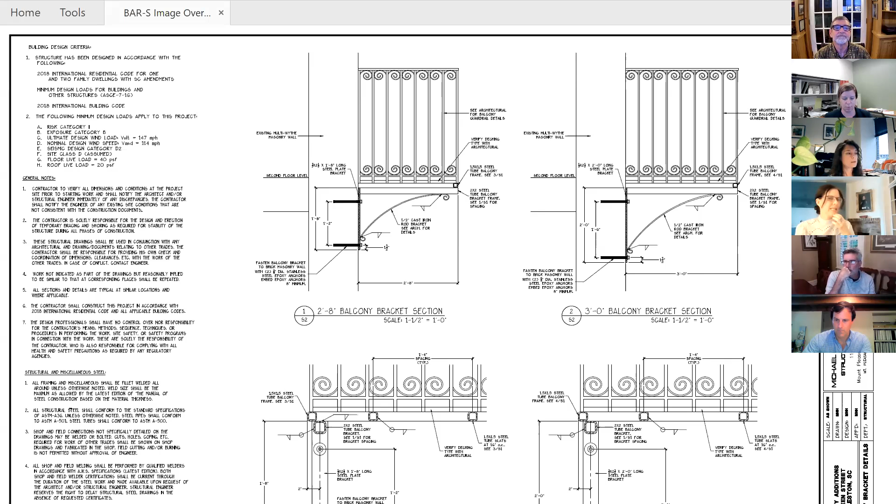And we have Mr. Tommy Attridge. If you want to take it from here, you've got the floor. Sure, thank you. Can you hear me? Yes, we can. Okay, great. Thank you. I'm the homeowner of 128 Sans Souci Street. We're proposing to replace the original windows in the home.

While we love the look and feel of the original wood windows and want to replace them in kind, they leak consistently in heavy rains, which has created rot and maintenance issues. And they're obviously incredibly energy inefficient, with excess heat, cold, and moisture in the dwelling. As I mentioned, they leak at various locations during downpours and heavy winds and have rot issues for that reason. They're also painted shut, so for fire safety, the windows cannot be opened and accessed from any of the three upstairs bedrooms, as well as any of the windows located downstairs on the main floor.